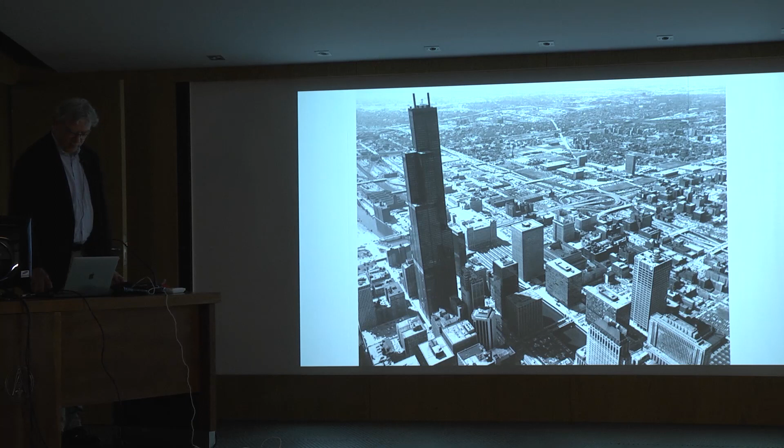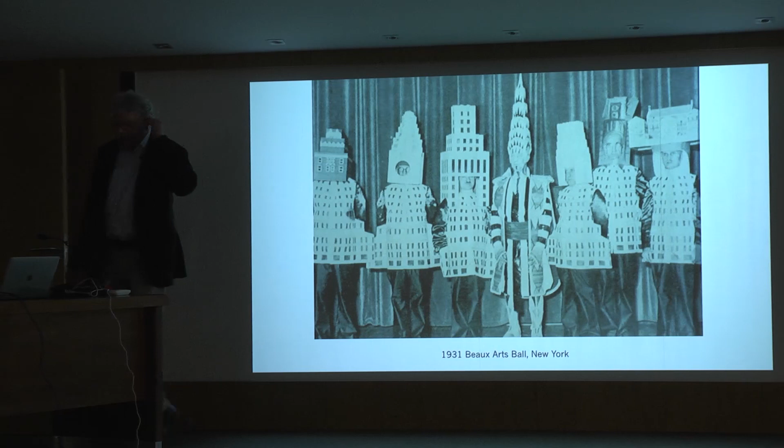So in the early 1930s, these aren't structural engineers, by the way, these are architects. Some of the buildings you recognize. This is Philip Johnson, who just recently passed away. But I show this because it's about a personal approach to design. So architecture in taller buildings is a bold move. The engineering behind a lot of these buildings is quiet, but still super important.

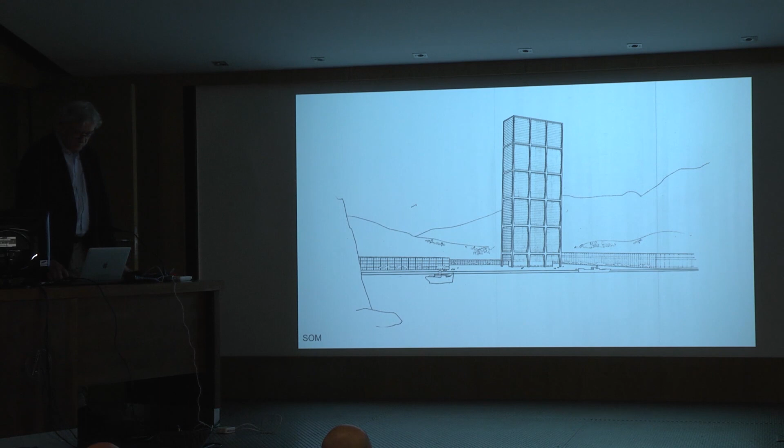In this case, the mega frame was infilled with a more lightweight frame as part of his thesis. The braced frame expressed demand in the structure and the density of material as it approached the base of the building, to resist lateral loads - this was part of the concept. This clear idea of hierarchy of structural systems was one he developed in his thesis work. The two ends of the building represent two different opportunities for bracing the structure, both valid, but using slightly different ideas.

So it was the engineer, Khan and Graham, that worked together, and that's what we stress in the coursework here and other universities around the world. How does the engineer and the architect relate to one another and create moves that change the way we see architecture and the way we use material?

The Hancock building emerged in the late 60s, starting as two 40-story buildings that became 100 stories. The argument was that the material used in this tall building would be similar to the 40-story building if placed properly. So this braced tubular frame was conceived, and the expression of structure is within it. The idea of load sharing within the structure was all part of the concept, resisting both wind and gravity loads. These moves, particularly in the Hancock building, which was built before the Sears Tower, helped shape Chicago and create density, sparking future development around these taller structures.

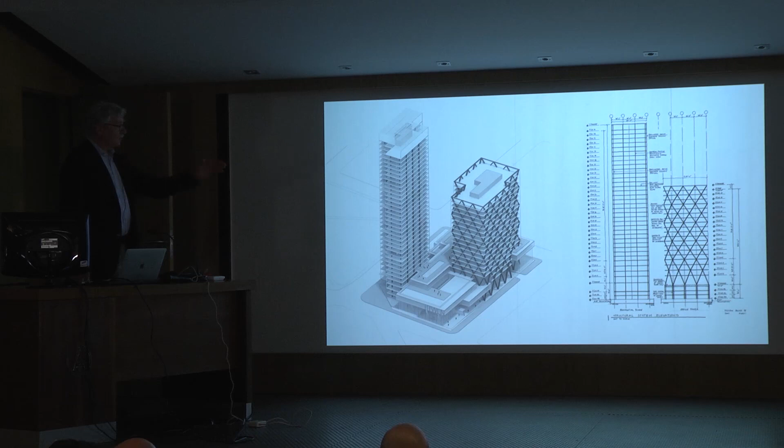So the concrete building on the left is for the residential tower, the steel braced frame for the office building on the right. In fact, the idea is to use composite materials for that building, where the horizontal systems are concrete and the vertical systems are steel, to resist the lateral loads.

We used a deep foundation with piles capped with a raft to create that structure. Winds that impact buildings and create vortices are those we use in design. The idea of movements of buildings is not what you expect. For a tall building with wind approaching this way, the movement's actually left to right, because the vortices that enter around those buildings tug on the building from left to right, and that's where the dominant motion comes from.

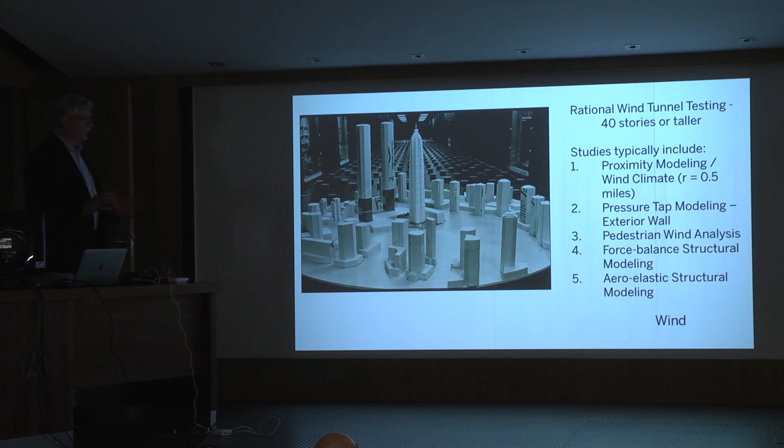Because those two tall buildings excited Jinmao. As the dominant wind came through these two tall towers, it excited Jinmao, magnified the forces by around 25 to 30%, and we designed for them. Even though those buildings weren't there, the plan was someday to build something tall, and that's what we used for the study and the final design.

But things like, where is it? Where are we trying to build this? The proximity of the tower, typically it's a half-mile radius that we look at. We look at pressure along the height of the building, the pressure taps used to look at localized pressure.

We looked at the pedestrian wind analysis, the photograph I showed you earlier. We look at something called force balance, which is taking a very simple foam model and reading the forces and demand at the base, then superimposing those values with the dynamic characteristics of the tower. And finally, an aeroelastic model that can look at different degrees of freedom. For Jinmao, we looked at three degrees of freedom: translation in two directions, and torsion.

Okay, seismicity. In areas around the world, seismic design is becoming an increased part of what we do with tall buildings. Here's some of what we think about: the intensity, the ground acceleration, the spectral acceleration, and what is the value of the earthquake? Is it a design-level event where we're designing components, or is it the maximum considered or maximum capable earthquake, where we're trying to keep the building stable in a major event?

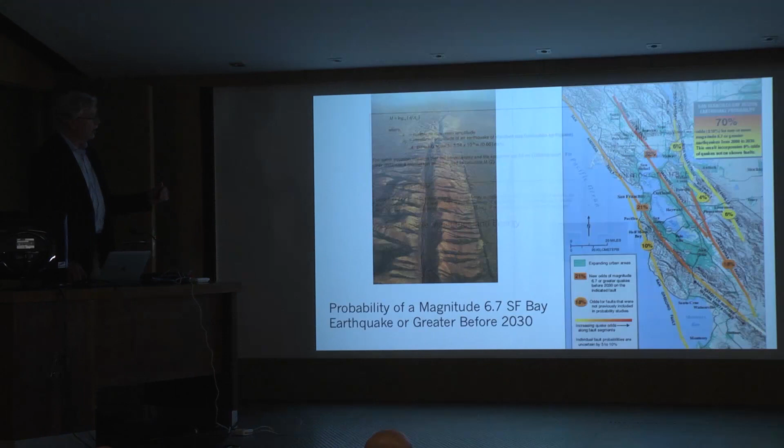So here's San Francisco, and I live right around here. So I'm straddling what's called the Hayward Fault and the San Andreas Fault. It's the Hayward Fault that people believe is going to be the next major seismic event. Director Manuel was just at UC Berkeley, and I know there are professors here that have collaborated with UC Berkeley. It's basically right on the Hayward Fault. In fact, their stadium straddles the fault, and it's designed for it. But that's where we expect to see the next major earthquake in the Bay Area.

When you talk about magnitude of an earthquake, people always wonder, well, what does it mean? What does it physically mean, right? So if we had an 8.0 earthquake, it means that the ground acceleration is about 0.5 G, and it translates into a certain level of damage that could be expected. So there's a way to take the numeric side of the earthquake and translate it into the qualitative side through these comparable metrics. When we're designing buildings, a lot of times we're using this response spectrum.

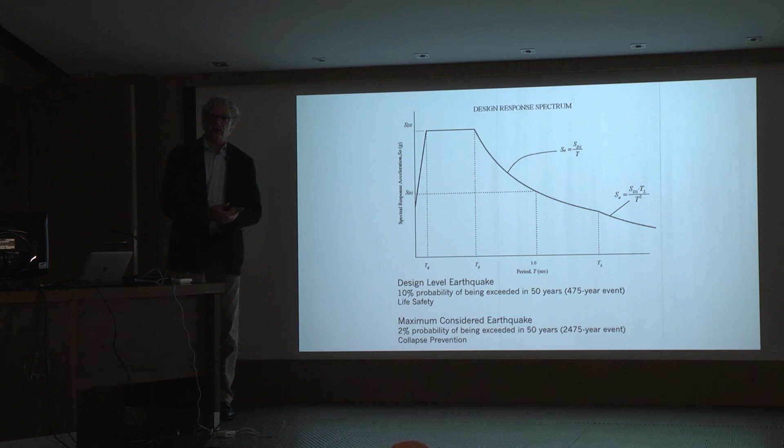This is typically from the code. And the way to think about this, especially for those students, is that the fundamental period of the building is usually the period that you get the most action from, okay? What I mean by the fundamental period, it's the period that a building takes once it's excited to go from 0 to my right, through 0 to my left, and then it comes to rest. So a taller building takes longer to go through that motion, softer, right? So a taller building has a longer period, and what you find is the fundamental period is out on this graph.

Now what does it mean? It means that the acceleration that you're designing for is less than a shorter building, okay? So you have a shorter building with a very short period, it's going to be moving probably with the ground, and again, it's going to take high demand relative to the tower that sees lower demand. So what we're trying to do is trick buildings to actually behave like this. So when you seismic isolate a building, could be a shorter building, you're trying to push the fundamental period out that way, right? So that's the way to think about it.

A lot of people think all tall buildings, it's scary to be in a tall building in an earthquake. In fact, if it's designed right, it's the best place to be because it's going to go through the motion in a slower way. Usually interstory drifts might not be as high, and it's actually, if it's done well, it's the right place to be.

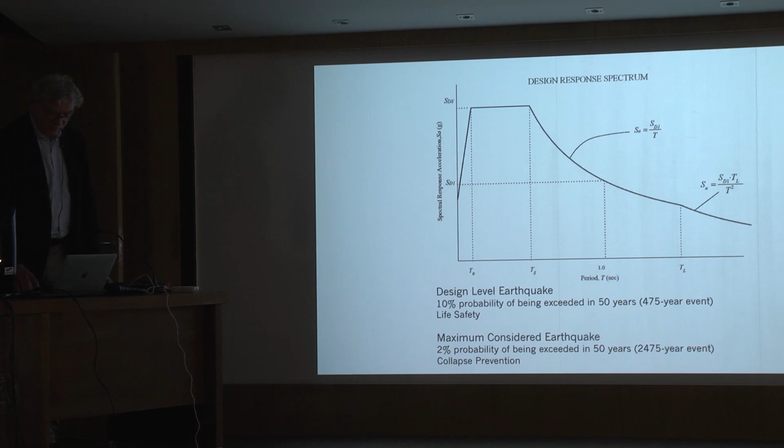Damage is really important, okay, in buildings of all scale. But when we design our buildings today, based on the building codes from around the world, we design them to be life safe. The structure may not look so great afterwards, but it's designed to keep people safe. The walls are meant not to collapse on us. The ceilings are not meant to fall down on us. The structure is meant to be beaten up, let's say, but still in service. Usually it needs to be repaired. Sometimes it needs to be taken down and replaced.

But what we're pushing for is how do you create buildings that are approaching operational modes after the earthquake? How do we make them more resilient? That's a problem because a lot of times in order to do that, it costs money to do it.

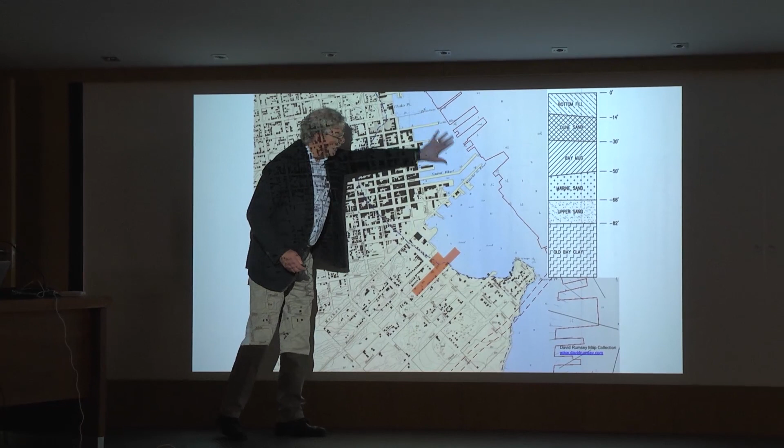In the Bay Area, we're susceptible not only to the earthquake, but to what happens with the ground. The bay along the waterfront, where you see these piers today, was built well out into the water, and the entire area was filled largely after the 1906 earthquake. The Transbay project tower and terminal are here, with part of it actually sitting where the water used to be.

This is what it looked like 100 years or so ago, and here's what it looks like today. This area is what we call risk to liquefaction. If you have shallow foundations in this red area, you're likely to have a loss of strength of the material at the surface during an earthquake, because a lot of the sands are saturated, and you basically lose the strength.

In 1989, Loma Prieta, we had a lot of damage to buildings along the waterfront here. So the point is, for tall buildings, you need to be down on the deep sands, or you need pile foundations to rock in order to develop in this area. That doesn't keep people away, because we've got a lot of development right here, right in this red area. This is the financial district of San Francisco.

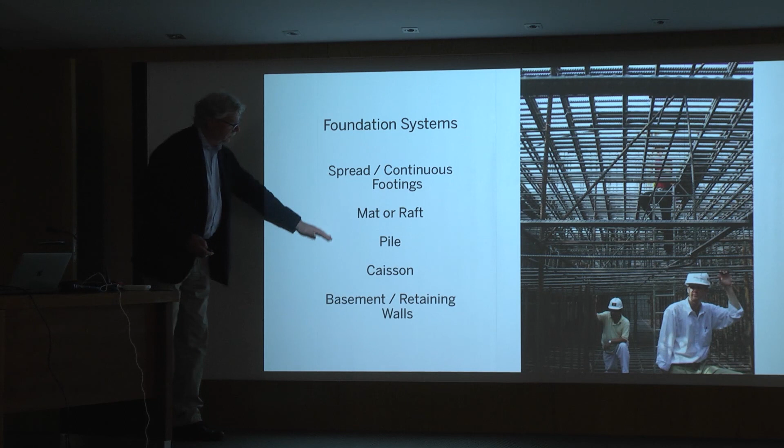When we talk about tall buildings, there's a mix of materials we might use for foundations, from spread footings with lighter loads to mat foundations and piles with heavier loads. What you see there is an image of the Burj Khalifa. That's the foundation mat, 3.7 meters deep, and you can see the concentration of reinforcement that was used there.

The Jinmao Tower in Shanghai was built on one of the worst sites in the world. It's 420.5 meters tall, an office building and a hotel, with 3 basements. But the issue there was that we needed to penetrate the soft upper layers.

So what we did is we drove piles from the surface down around 80 meters below the surface to create a bearing situation at the base, using open steel pipes that were driven with what we call followers. They were pipes we could take away for the top section, and we would leave the rest of the piles down at the bottom.

Then we created a system—we learned about this yesterday in class—how do you create temporary systems throughout a site so you can build your tower first? That's exactly what we did here. We built a reinforced concrete system in between the floor levels with temporary steel columns that could all be removed while we inserted the new construction in between, and that happened after the tower went forward. What you see at the bottom here is the tops of those pipe piles that were exposed after the soil was removed.

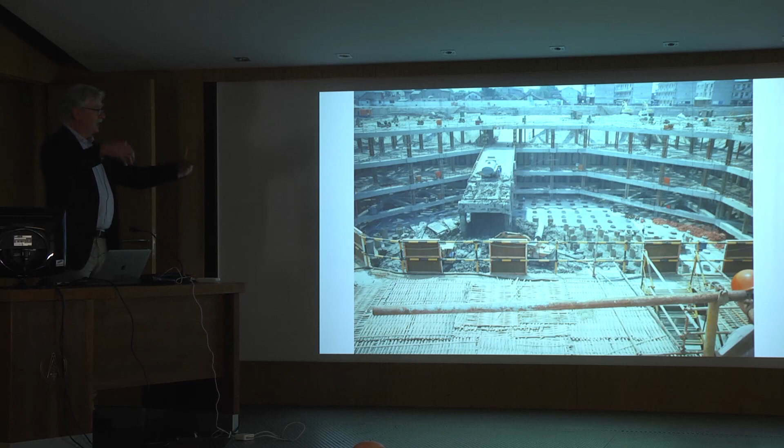Around the perimeter of the site, it's just raw kind of ideas—nothing beautiful about this except for the science of how it's done. Bentonite is used in these trenches, whether it's in Shanghai or at Harvard University where we did a science building. They're done in segments, called a slurry wall, where we insert a cage that goes down—you can see the height of the wall there—and then we pump concrete into it, and it becomes the permanent cutoff wall for water entering the site, providing the means of actually making the excavation.

We talk about displacements of towers. It's real, it's a real challenge. At Jin Mao, the tower core is here, the podium is here. This big black line is the actual measured deflection of that tower, around 70 millimeters in this diagram. In the end it was probably a bit more, maybe more like 80 or 90, and what you also see are the predictions we made along the way.

I'm sure you've read about towers settling. There's a tower in San Francisco that is settling more than what was expected, and the numbers are much bigger than this. But we worry more about differential settlement and tilting than straight down settlement. This building kept settling uniformly, and other than the problems at the street level and utilities, we don't mind—structurally, we don't mind for the tower.

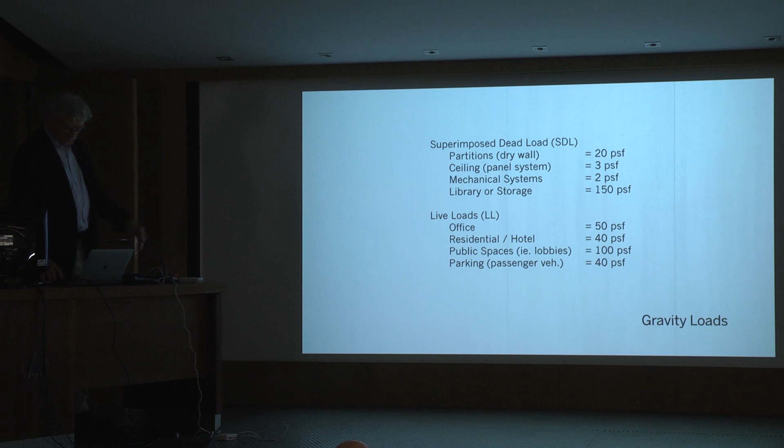The way we use the building, the loads that we put on the buildings, is really important. Whether they're live loads or superimposed loads, it helps us get the weight of the building correct. It also helps that we know what our site is like. Wind pressures over the height of the building are very important, and they translate into forces based on the tributary area that they impact.

These are forces that we apply to the tower itself. When we design for earthquakes, we look at the horizontal earthquake and the vertical earthquake. Both are impactful. For many sites, we use the code for vertical earthquake effects, and there are calculations you can make. But if you wanted to be more sophisticated, you'd actually do a site response spectra, looking at ground motions, both vertical and horizontal, to design your building. There are lots of ways of doing this, and the European codes are a bit different than international codes or codes in cities in the United States.

But the fundamental idea is you're trying to get a base shear at the bottom of your tower, and there are factors that impact it. Period is one, and also a factor called R, which is a response modifier. For buildings like frames, R is higher. If R is higher, the effective force that your building sees is lower.

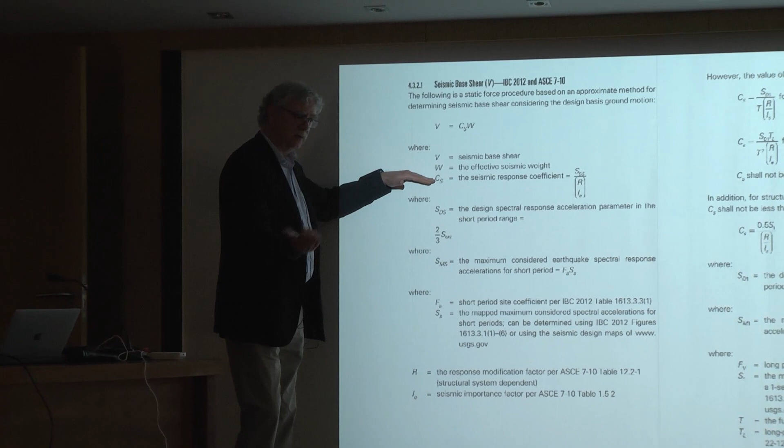So if you had a concrete shear wall, the ductility factor would be lower, it's less ductile, the forces would be higher, compared to a steel frame. These are tricks you can think of in systems for structures and tall buildings that impact ultimately what the forces are and how much material you use in the building, whether it's by code or by performance-based design, which I'll talk about a little bit later.

There are other things we think about, like seismic dead load. We're not going to get all the live load at once, but if you have storage in your buildings and other things, you have to take a fair amount of that into consideration. Mass impacts the lateral system, and keeping the mass down is very important if you can do that, because that's going to lessen the seismic demand.

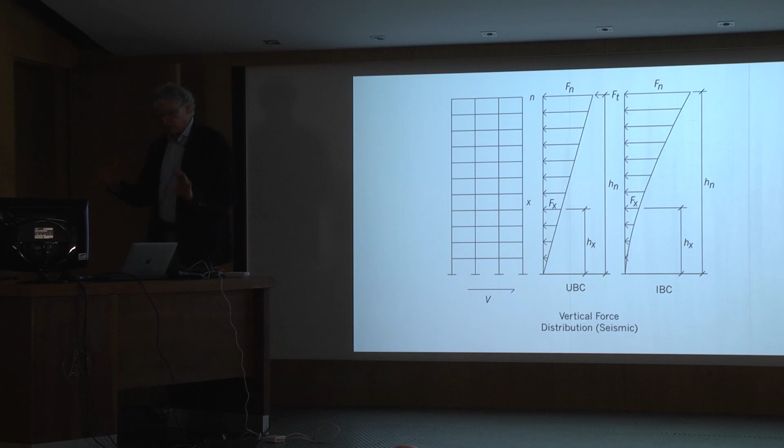Then we take things that are regular, like that building I showed you earlier with the moment frame, and we apply code-related demands due to seismicity. For years it was a triangular pattern; now it's slightly nonlinear in terms of the application of force. The idea in older codes was to apply a force at the top that considered higher mode effects, since buildings that vibrate at a high mode of vibration activate mass, which was the reason for that higher concentration of force at the top.

So you take the forces calculated at the base of the building and push those forces vertically, creating shears within the structure, and then story shears based on the floor-to-floor heights. You come up with loads and bending moments, and these moments are used to design things like the bases of shear walls or frames. These are things you can do by hand to take something really complicated and create something you can understand the fundamentals for.

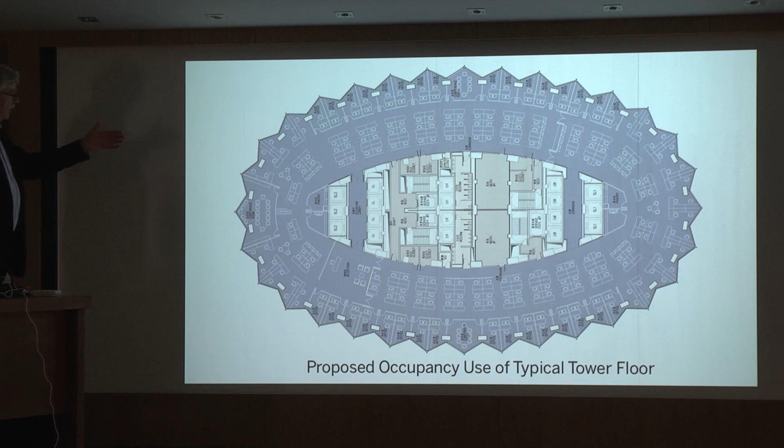This is an example of a tall building in China, in Tianjin. I show this because the use of these buildings is very important. Yesterday we talked about elevatoring in the service area—the core is largely driven by services. It just so happens that in a lot of these tall buildings, the geometry of the enclosed area for services, elevators, mechanical rooms, restrooms, is about what you need for the size of the structural core in the middle. In this case, you have a frame and occupied areas that are like bay windows—really great office spaces because you don't have anything in the way as you look outside.

So we take these loads and apply them to buildings of different geometries, whether it's cores or occupied spaces. We're trying to come up with a way to create an equivalent situation so that we can actually design it. Otherwise, if we're stuck in too much detail, we'll never get to the finish line in terms of the final design.

We need to think about the exterior wall. In seismic events, heavier systems create more demand. So precast plus glass at the exterior wall is a lot heavier than metal plus glass.

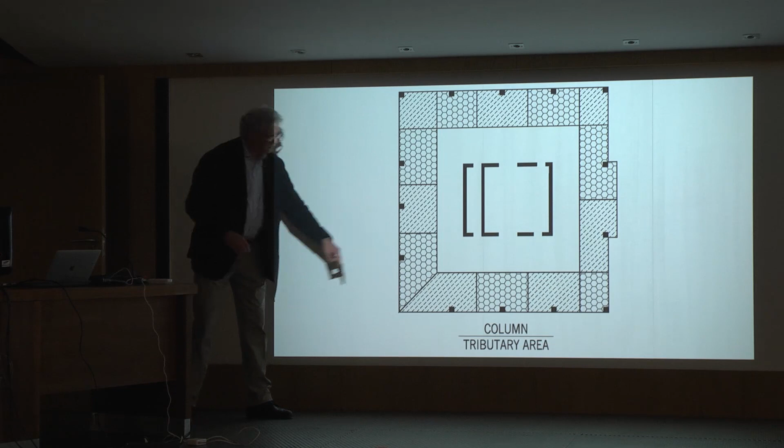In a tall building, you can break it down into some really simple geometric ideas, where the core takes a certain amount of gravity load and each column takes its own tributary area. Why is this important? Because we're trying to get the gravity loads down into these columns so we know the load it sees. In certain situations where you have cantilevers, that demand is going to be higher, and column sizes are likely to be higher.

Then you combine all these loads to create a force that you design to. So you combine dead loads plus loads due to fluid effects, snow, wind, live loads and so forth, using statistical ways of combining them together. Earthquakes are really important, and certain key elements require overstrength. You see this omega factor, which amplifies the force for elements you just can't lose in a major event. Sometimes that value can be 2.5 to 3 times as much, to put extra material there to protect that particular element.

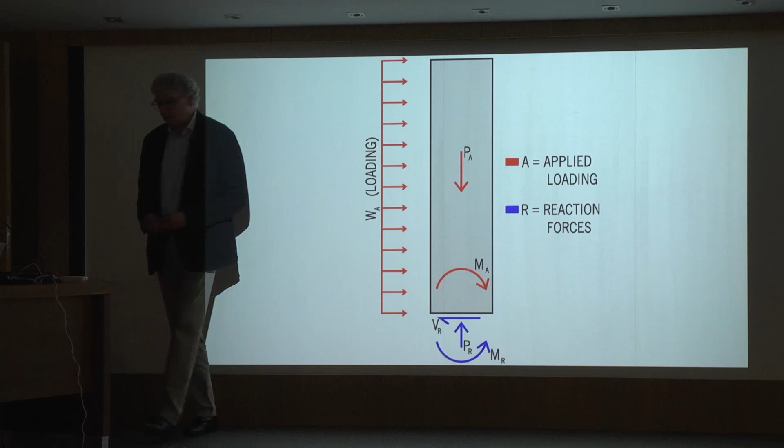But if you were to take a tall building and simply look at the statics, this is more or less what you have. If you had an applied load due to wind, and you had gravity, you get an overturning moment and resisting forces. You could then dissect it and use moment arms and so forth to resist those loads and come up with some initial sizing of the structure.

Now why is that important? Well, if the building is overturning, and let's say this was the front side of the building trying to turn over, you could look at the loads due to uplift, and hopefully the weight is counterbalancing the uplift. So knowing where the forces are due to the weight of the building is super important. You define this, you figure it out, and put the forces where you want them.

In some buildings, we have higher concentrations of forces at the corners. There might be two big columns that we force gravity load into, to resist overturning. But it's based on these principles that the tall building is like a beam. Loads are applied, there's a web, there's a flange on each side. It looks different in a tall building — it might be columns that make up this system — but the concept is the same.

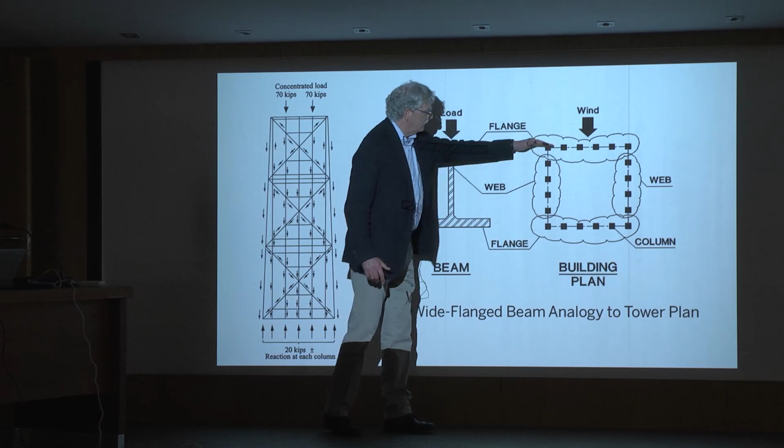So for bending, we're trying to distribute the load through the webs and the flanges. Typically in this kind of situation, the web might be skinnier — maybe these columns are smaller due to the demand, and these are heavier, okay fine. But then the winds can come the other way, demand can come the other way, so you have to think about it multi-directional. The sizing of it is not respecting a single direction of force.

The other thing that's really important to us when we conceive of these buildings early on is drawing a structure to try to understand what the major systems might be. In this case, it's a composite building. We've got a core wall that's concrete, we have steel framing, and we're introducing this idea of box sections in steel that also act to distribute forces.

Air coming out of the core could feed into these elements, and then you could distribute them into the floor system. Get rid of the ductwork, right? Just get rid of the ductwork.

There's a lot of resistance to do this. And why is it, especially in places like the United States? Well, it's because the trades are different. The trade to build this concrete wall is different than the steel trade, and it's different than the mechanical engineering trade. So it's a struggle to try to just integrate what we think is the best way to develop the design.

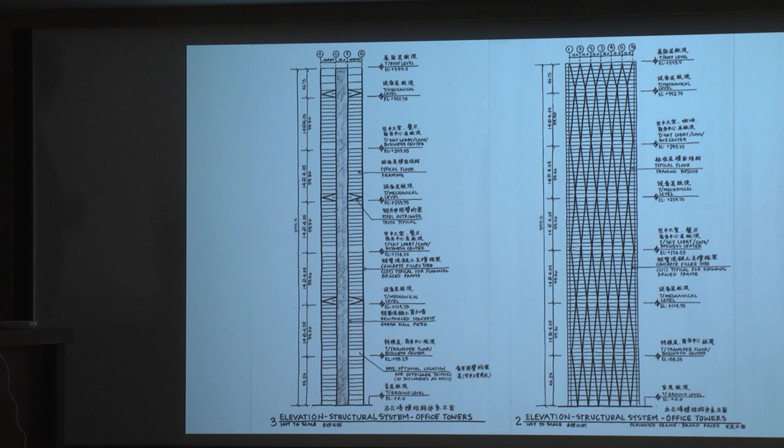You can take the core wall system in a tall building and link it to columns or a frame, in this case, by outrigger trusses. These outrigger trusses have an interesting shape, just a triangular form. What happens is this core wall is subjected to lateral loads. It applies load to each side through the outrigger, and the frame at the outside looks like that. So that point lines up with this point, right? And it applies load due to overturning, but it does it in a creative way. It's not a single column on the outside frame, it's a diagonal frame instead.

There are 35 drawings for the Hancock Center in Chicago for the structure. That's it, 35. And this is one of them. Really straightforward. Why do we have 10 times this many drawings today when we draw the same building? I guarantee you, if we drew it today, we would have 350 drawings probably.

The reason why it's frustrating is because this is all you need to show. You have the frame at the outside. The sizes are shown elsewhere, single sheet. You have a core wall, a core system that exists within that inside frame, and you show it on another sheet as it changes. But the outside frame to it is exactly the same. And the beam sizes are shown here, column spacings are shown here.

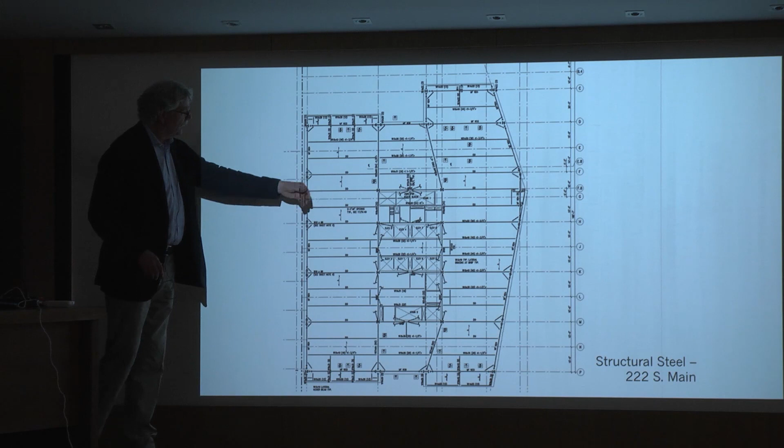It's a technique to show what structural elements are. And as students, we think that this is very important. Force yourself to draw it because it helps you see other things, like how does the exterior wall connect? How does the MEP work? How does the ductwork come out of the core? How does it relate to the depth of the beams? It's all super important, the idea of mixing systems, concrete walls and steel framing.

If you look carefully at this, there's something different happening over here. There are signs of it, right? It's a frame, you don't quite know why. But if you look at the full set of drawings, you'll find that at the bottom of the building there's nothing here. So this is a large, three-story Vierendeel truss that works both vertically and horizontally to span the distance. So there are clues to seeing the structure through the drawings that aren't so obvious when you first look at it.

There's also clues when you see the structure's correlation with architecture. So this is a hotel floor in a building in China, and you'll see there's more or less a direct correlation, I hope, between the way this layout is seen and the way the structure's shown. In this case, it's just reinforced concrete columns and beams.

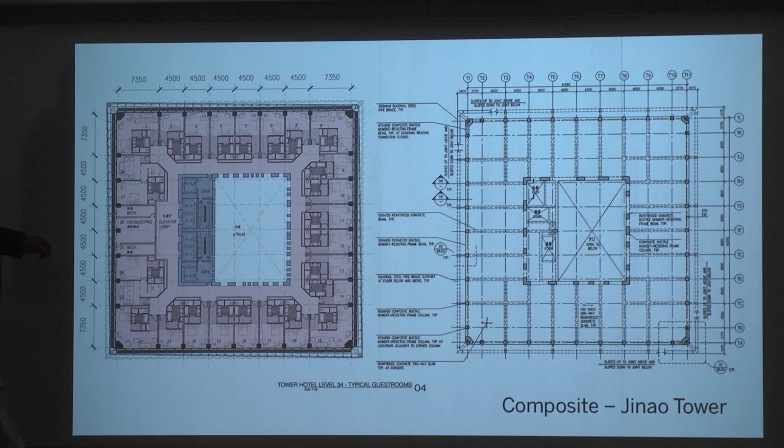There's something special happening on the outside of this, though, that is important to the building. In plan, you can't quite get the full picture, but in elevation, you see something that's different. There's a folding pattern that happens throughout the height, and there's a diagonalization that happens. What we did is we introduced a steel pipe that wrapped the structure. Yesterday we actually saw one of these, and I think we'll see this later when we look at the models that were built.

One of the students, or one of the student teams, looked at the same kind of system that we used here. But that was not to complete the X on the face of the building, like the Hancock building, but to think about the building three-dimensionally, so that the X was completed on the other side.

So this face has a diagonal member. On the opposite face, we put the diagonal member in the mirrored position, so that every time the demand came from wind or seismic, you always had members that were either in tension or compression. And the wrapping of this system was important.

It wasn't just because the structural engineer wanted to do something different and fun. It did many things. It held the exterior wall and created the pattern at the outside. It created a double wall system, exterior wall to inside wall. But in terms of the structure, it took what conventionally would be done in the tall building where you have a very heavy shear wall and a frame on the outside. And we were able to perforate the frame, take away a lot of concrete because we had the simple wrapping of steel on the outside.

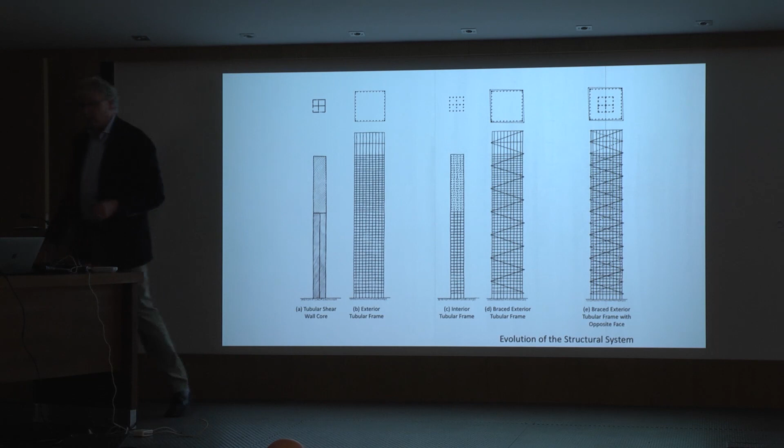So why do it? Well, you do it because you reduce construction time since you have less material to place, and you reduce the amount of material. We were able to take about 20% of the concrete out of this tower by simply wrapping it with the steel pipe. It's a conventional 2-foot diameter pipe that varied in wall thickness, attached to the outside and wrapped all the way up. The frame in concrete was designed for gravity loads essentially only.

The Sears Tower is interesting for many reasons, not just because it's a unique structural system, which is a bundled tubular frame. It's a series of these units that are linked together. This is nominally 15 feet on center, and it just repeats.

Sears came to us with this idea of the super tall building. It would be the tallest building in the world for many, many years. But how can we build that building quickly? How do you come up with an idea that could be pre-assembled and then quickly bolted together?

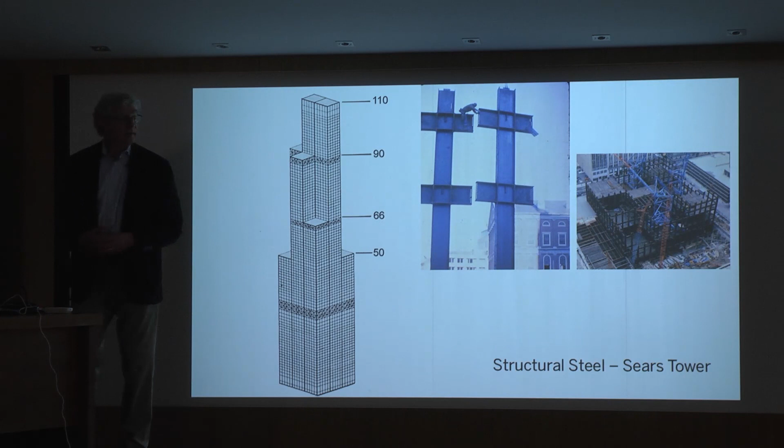That's what we did here, where the bending moment was very low at the midspan because it's mostly dominated by lateral loads due to wind. We're able to simply bolt the midspans together and quickly build this building in modular units all the way around. So today we still think about this in our buildings — how do we come up with modular ideas, things that are prefabricated where we can control quality and then get it to the job site and have it built quickly?

When we design buildings around the world, we're looking for clues, looking for inspiration. In China, there are many opportunities to not only build buildings that are tall, but also look at cultural issues that resonate with the people that live there.

Some of you may have in your apartments or houses screens that separate rooms. There's a frame, like Goldsmith did, and then the insertion is a diaphragm. A lot of times it's translucent — it could be fabric, it could be something solid. But the interesting thing is that the fabric helps to stabilize the frame.

In China, there were these screens that we thought were interesting. So how do you come up with a way to translate that into a building that is nominally 150 meters tall and 100 meters tall? And then actually look at two different faces, a face that expressed structure and a face that didn't.

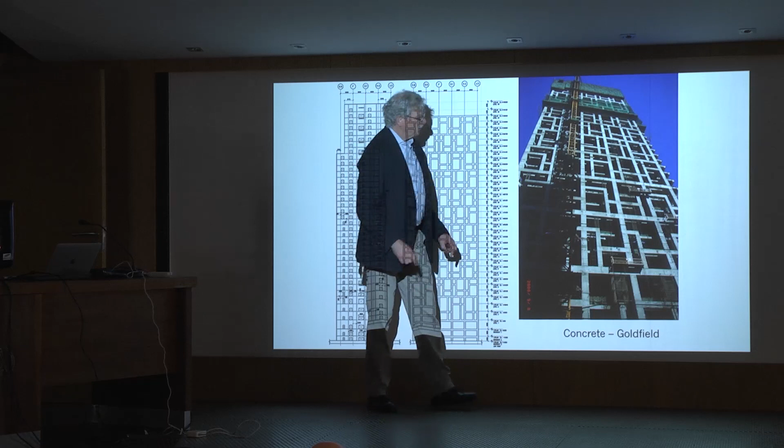And if you look carefully at the way we built it, we held out the elements in the structure. Why'd we do that? Because the gravity loads on the building, we wanted them to be inside these major columns. We didn't want them to load up these asymmetrical frames. So we left the concrete out, so that the loads, the creep, the shrinkage, and the elastic shortening all occurred in that main frame.

And then we went back, before we put the exterior wall on it, and we filled it in. I was on a flight with one of our architects and had this image in front of me. You look at this and think, my God, what am I going to do with this? It's just crazy, right?

The easy thing to do would be to build a frame and decorate it, just put the exterior wall on it. Who cares, right? And I started to think, well, what about the negative space, the space in between these lines? So this is a representation of the negative space.

And then flip it to the positive. Make these spaces that were dark, these negative spaces, turn positive, in this case the white spaces. And then reverse it, make the dark lines structural, and use them as infills.

This is an earlier phase of the project. The geometry changed on the infill, but the concept was the same. And then the major frame there was on the far right. That was the regular idea: three modules tall and 9 meters wide.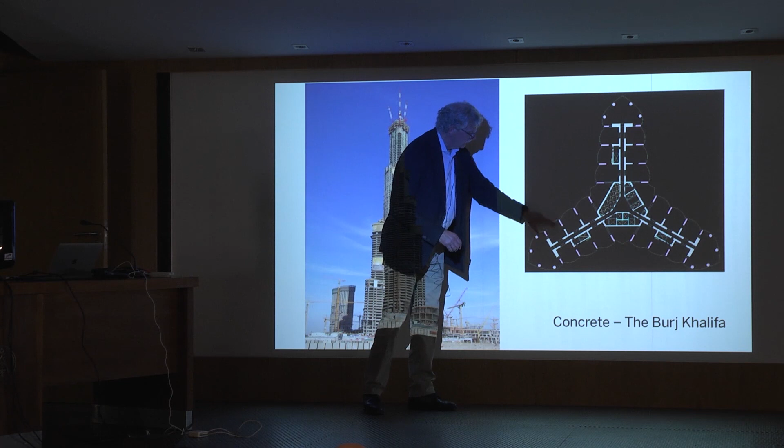So when you read this structure, you see that you have these major spines that form the corridors for the residential units. And then splaying from those spines, that center spine in each direction, you see walls that project beyond that. This is called a buttress core.

The core is pretty regular all the way up the building, and it's closed and torsionally stiff. That's where the elevators are, that's where the mechanical spaces are, back of house. Everything else, essentially, there are some stairs, but everything else is your unit. And your unit doesn't have any column, right? It's all open, a really straightforward idea.

It's a tripod, like that tripod right there. It's a very stable and efficient way to resist lateral loads. And it's done in concrete, not in steel. It was the tallest building, not only in the world, it still is, but the tallest building in concrete.

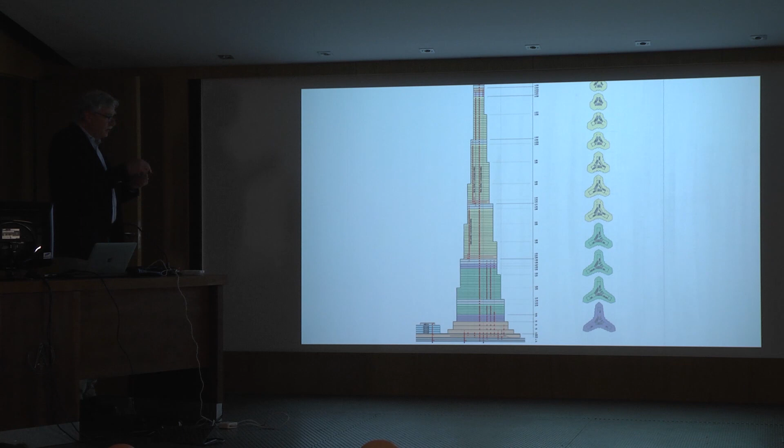As it steps upward, there's an erosion of the form, and there's a transfer of loads. So the loads coming down from above with these smaller pieces are transferring in and moving down through the system. But everything you see in terms of the inner workings of this building are all aligned. The core is aligned, the stepping is aligned in a way so that we don't have large transfers, and it all respects the form of the outside.

Jin Mao, you can't understand what the structure is. You look at it and say, okay, it looks like a pagoda, right? Okay, fine, it tapers. But what you'll notice, if you look carefully, is that there are 4 points in the tower that stay in the same position all the way up.

If you stand at the bottom of this building and look up, this is a straight face all the way from the bottom to the top. And if you walk around, you see the same on the noses of the other sides. So what happens is that the form erodes back in between those 4 points. And why is that important? It's because we could take a big core in concrete and link it to 8 columns at the outside.

It's the first time it was ever done this way, and I'll explain what I mean. In China and other places around the world, when you look at tall buildings today, most of them are using this system, and the reason for it is that it's a very straightforward idea of linking the core to the outside with these big trusses.

It's called an outrigger system. You can use steel or concrete for the walls if you wanted to link them. What it does is link the core to the outside during an earthquake or during wind, and it acts like arms—like reaching for ski poles to stabilize yourself. That's the idea. The principle isn't any more sophisticated than that.

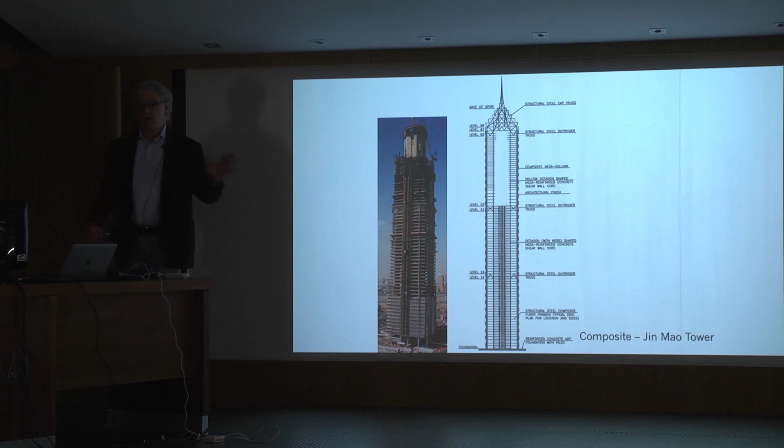And then you can take that and create architecture in plan that's pretty interesting. The office building at the bottom is really regular, like a square, and then you erode the sides at the top. For the hotel, we need less space, so we erode the outside and put a large atrium in the middle. All the rooms have good views.

All the rooms have easy access to the elevators here, which connect to a sky lobby above the office space. If we tried to put the elevators in for the hotel space above, this core would never have worked. So we put a couple of elevators in to get you to the sky lobby, you get out, get your key, and move into the space above.

So we're able to use this huge scale with really straightforward principles and mixes of materials to create a structure that, if you learn about it, you understand why we did certain things in terms of stabilizing it.

And the space within the atrium is pretty dramatic. I think it's still the tallest atrium in the world—around 650 feet or so. You can see the elevators on the right-hand side that service the hotel.

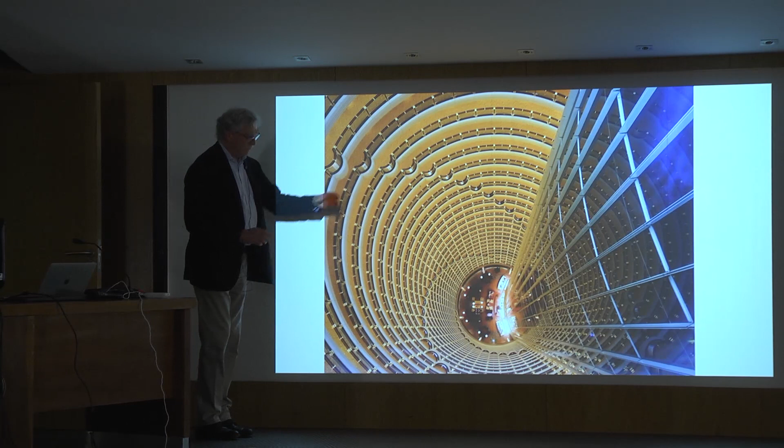It's a circular form inside of the octagon, and that circular form has a simple move of a projecting slab that creates this spiraling effect. It's through this simple projection of the structural slab that we created it.

Putting openings in tall buildings is important—it helps the winds pass. In this tower, which is very slender, we allowed an opening in the broad face of the building, nominally at around 2/3 of the way up. This was used as an area of refuge for fire, but it also allows the winds to pass through.

What you see in this building is a bit of an expression of two buildings. On one face, the south face, you see this braced facade. On the north face, you see a regular frame. And we link those two frames together with trusses.

The frame on the south is really important because it resists lateral loads in the direction along the frame, but it also helps with resisting overturning and distributing loads from column to column. So it acts almost like a belt over the height of the building to distribute the loads across. So the south looks like this—there are two towers.

The other thing I'd point out is that normally in tall buildings, the elevators, like I showed you before, are loaded with concrete—they're really strong, it's where you put all your material to resist the load. In this case, we wanted to change the idea: make this translucent and transparent. This is where you'd use the elevators and restrooms, and we made it light-filled, lightweight.

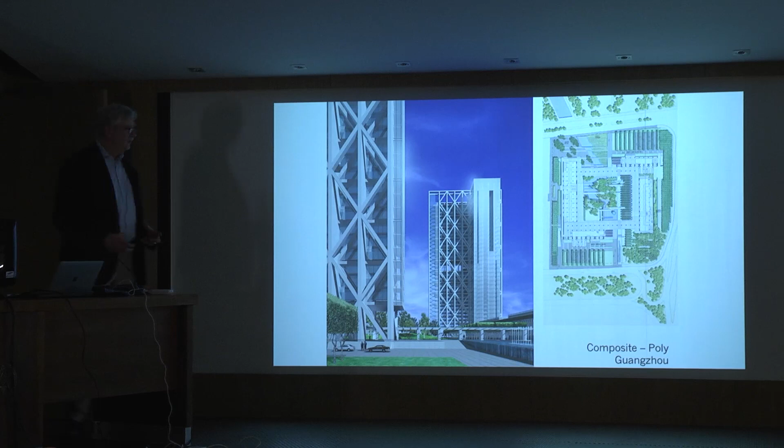So we attached these vertical cells to the main structure, to this billboard, to create a new concept in the way you use the building. So the north face is really regular.

What's important in this building is sun. The sunlight on the south moves east to west, and it projects against that diagonal grid, which also helps to shade the south face. This is in Guangzhou, China, where the summers are very hot, and we're trying to control the temperature gain inside the building.

The spaces are column-free, so the frame on the north versus the braced frame on the south—you can see the way the services are plugged into it on the back side.

We used a mix of materials, steel and concrete, to create the braces and the walls, concrete walls braced with steel, and we use that for mixed purposes, as I mentioned before, with the walls set back.

Somebody would say, why did you use a double line of bracing? Why not just a single line? It took us a year to convince our clients to do this, because we thought it was interesting - the braces could be smaller to resist the load, but also the way the sun hit those two braces gave greater shading capability, plus it looked unusual. So we won the argument. We have these two smaller lines of bracing.

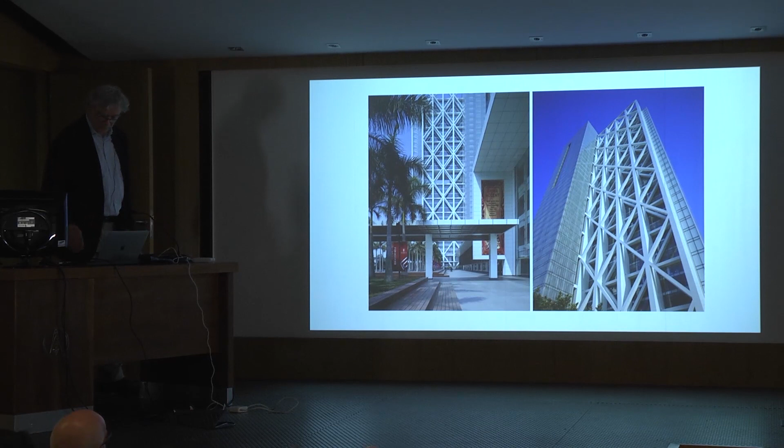The proportion could be such that we think is beautiful. It's quiet. The relationship with the ground is quite good. And it's a bit of a campus between these two buildings, where the base is just as important as the tower.

So when we think about tall buildings, there are these things called attributes and characteristics, and it comes from behavior. The Burj Khalifa is kind of a freak of nature - the scale of it is extraordinary. These are 40 and 50-story buildings.

Now, there are other buildings that have come that are taller. But it's the motion of the building, the serviceability, in addition to the strength, that's really important when we design the towers. So we think about wind and seismic events. For students here, in a maximum seismic event you may see 10 times the demand as the wind - 10 times the displacement, 10 times the forces.

We think about material, concrete, steel. And then we think about serviceability. What do we mean by that? These buildings are not static. They all move, and some move more than others.

But for wind, we typically look at a 50-year return event for drift. It's H over 500 over the height of the building, but also H over 500 of the interstory part of the building. And we design all the systems to include that relative movement.

We typically think of wind and elasticity. We don't want windstorms to make the building plastic, meaning it doesn't move back to zero. You want the winds to be intermittent so the building always comes back. A seismic event is totally different.

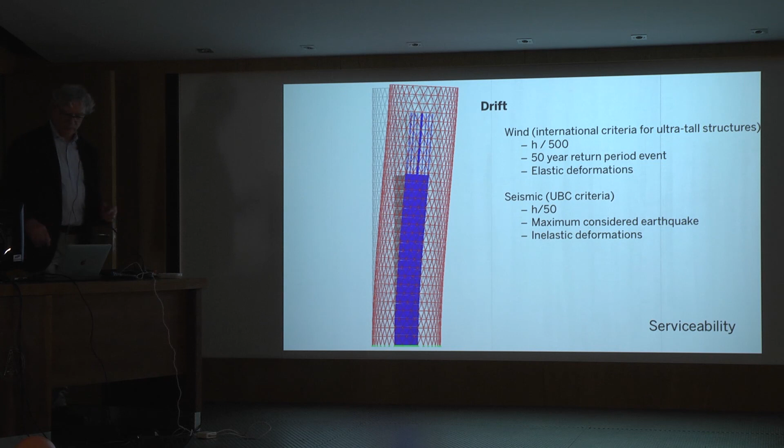Inside the building, it's super important to think about accelerations, and whether you're in an office, a hotel, or an apartment - these are all things we have to think about. In an office building we're more tolerant; you can take on more acceleration. Why? Because you're moving around.

You're sitting at a table, interacting with your colleagues, so your tolerance is greater than it would be in a hotel or apartment where you're staying most of the day, sleeping, with less movement around you - it's just yourself, maybe your family or partner.

These thresholds of acceleration are in thousandths of a G, so very, very small. The inner ear is very susceptible to motion, both translational and twisting motion, and it's worse when you have a point of reference. If you look out the window and see another building next to you while twisting, you'll start to feel sick. If that building wasn't there, you may not even feel it.

So these are things that we think about. We can calculate these - there are code equations you can use. But these values largely come from studies in the wind tunnel. You can also dampen buildings - you've heard about tuned mass dampers.

The structure itself dampens itself out. Concrete typically dampens out a building faster than steel. That's because, depending on the demand, the concrete cracks, it dissipates energy, it gets hung up, versus steel, which is elastic.

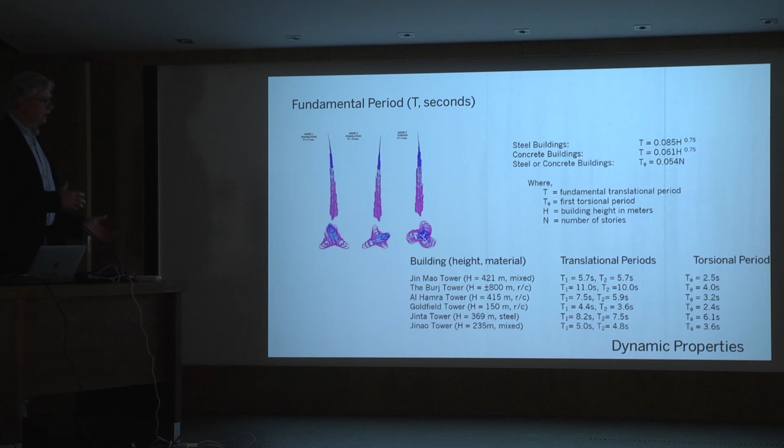And building periods are important - they get into the dynamics, the wind, the seismic. These are the periods of major buildings around the world, like the Jin Mao Tower and the Burj Khalifa. Jin Mao, which I showed you at 420 meters tall, has around a 6-second period, versus the Burj, which is twice as tall with about twice the fundamental period.

It doesn't mean you can't design a circular shaped building, but it probably behaves the worst in the wind because of the vortices. You could design buildings with openings to allow the winds to go through - that helps a lot, and it's a way to manage the forces. Again, it's the crosswind motion we're worried about, the dynamics that move the building this way rather than that way.

Hopefully I can play them. This is just to give you a sense of the issues of wind.

First of all, vortex shedding - let me just show a few things before we take a break. This is vortex shedding, and the idea of vortices, the organization of the vortices around the sides - this is what's tugging on the building to make it go back and forth. So that's for a square shape.

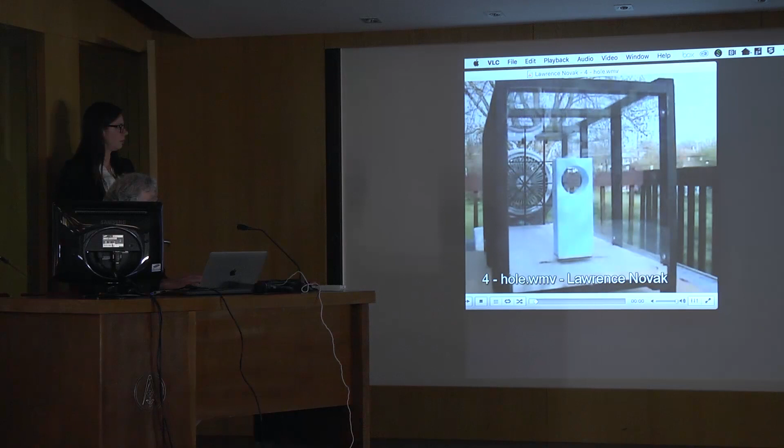Now you take the same model and put a hole in it - this is what happens. You can see some higher mode effects there that are happening, but it's pretty calm, a pretty calm building. So the big opening is pretty good - it's a good idea.

That doesn't mean our architects are going to let us do this. This is not necessarily what we can accomplish, but it's a good idea from a structural point of view.

Next idea, taller building, but put slots in it. It's better than the shorter building without the slots - let's try it one more time. So slots are good, and they're good because you can use them for other things - you could actually generate power by allowing the winds to go through the side and putting a turbine on the sides. Just an idea.

So it's dampening it out. The building motion comes to a halt much sooner. Now, what if you turned it? No, sorry, this is still in the same direction, only the geometry is a little bit different. So it's a bigger cell, and it's sitting on top of that rectangle that I showed you guys earlier. But it's doing a pretty good job.

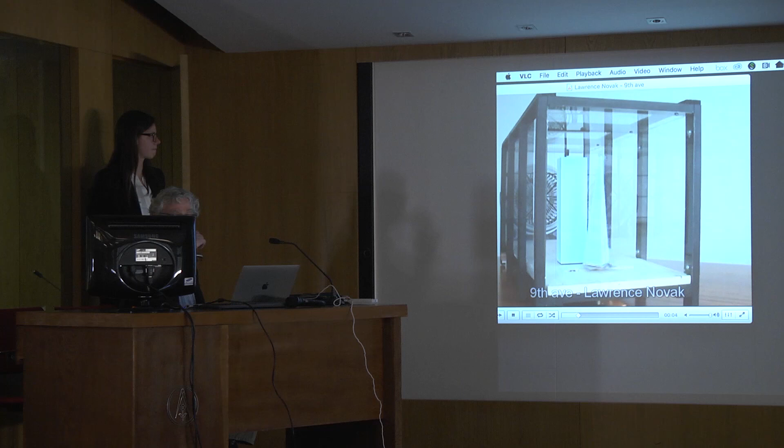Then we also talked about upstream buildings. So there's the rectangular tower upstream of the other tower, of the pyramidal tower. Now what's happening is that it's aggravating it and activating the fundamental period of the building, and the higher mode effects aren't that big of a deal, right? But look at what that tower did

upstream of the pyramid. So anyway, these are all things to think about, and they're qualitative, at least in the diagrams, right? They're qualitative. But when we design these buildings, you can at least start here and then verify it later on with more sophisticated testing and analysis.

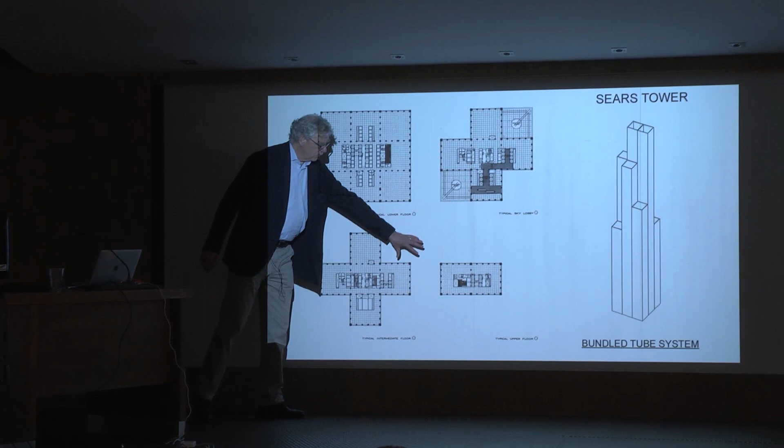It took individual components that had moments of inertia and combined them together to create something that was much more significant.

When we talk about tall building design, there are two things that we think about in detail. One is gravity load, and its impact on material quantities. The second is lateral loads, which could be wind or seismic. As you build taller, the amount of material needed for the gravity system increases linearly, fairly flat. But for wind or seismic, it becomes asymptotic. So the idea is coming up with systems that drive the quantities down for the lateral resisting system.

When we designed the Hancock building, it was one of the first times we used computers to analyze the structure. We created substructure models that verified the hand calculations. Fazlur Khan was an important part of taking the application of engineering and science, and applying it, using computing to speed up the process and come up with a dual way of getting the solutions.

When we talk about steel systems, they're like species of animals. Based on size and scale, the species changes. For shorter buildings, we might think about frames that resist lateral loads. As we get taller, the system changes from braced systems connected from the core to the outside, to that mesh idea I showed you earlier. These are ways we deal with very tall buildings and the efficiency in design.

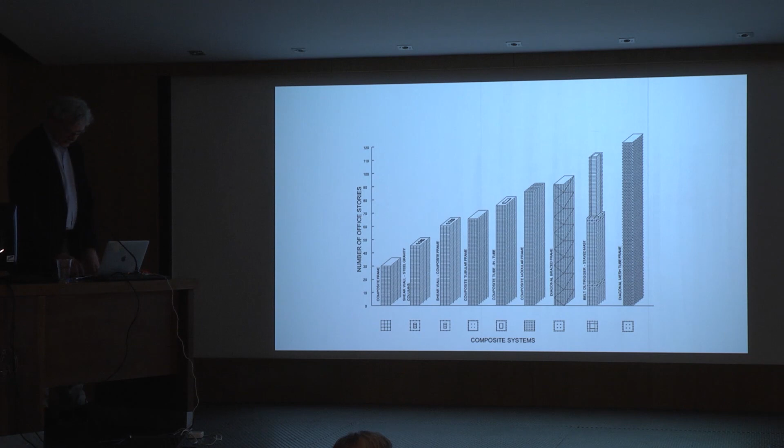This is important when we plan cities, because the geometry of these buildings can be changed. We can change the materials, we can make them more efficient. So when you layer in elevatoring and structure and so forth, what's left over for usable space is really important, because that's the leasable space.

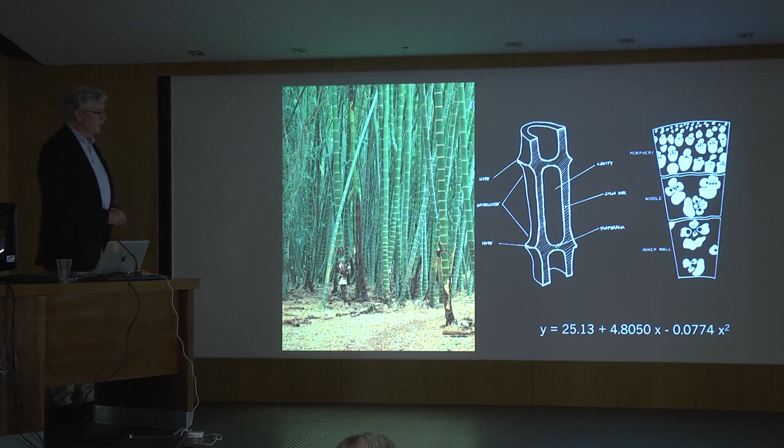There are quadratic equations that people have discovered that consider the growth of bamboo. When you plot them vertically, you get a curve like this. This curve is similar for the diameter, the wall thickness, and the spacing of the diaphragms. If you plot the wall thickness over its height, this is the height of the building, and this is the diameter. You find it's a quadratic equation, very similar to the equation for the bending moment of a cantilever subjected to a constant load. So the characteristics of bamboo are directly connected to the mathematics of how you actually engineer structures. Makes sense. It has to make sense.

We looked at this, and we think there are ideas that are important to consider. As with the spacing of the diaphragms in the bamboo that are not even, perhaps the spacing of the outriggers or the diaphragms are also uneven, tighter at the bottom where the demand is the highest. Yesterday we talked about outrigger placement and the idea of locking the base of the building in a more substantial way. That's the idea, but you can take it and apply it to buildings of various heights and incremental systems that have a mathematical basis to them.

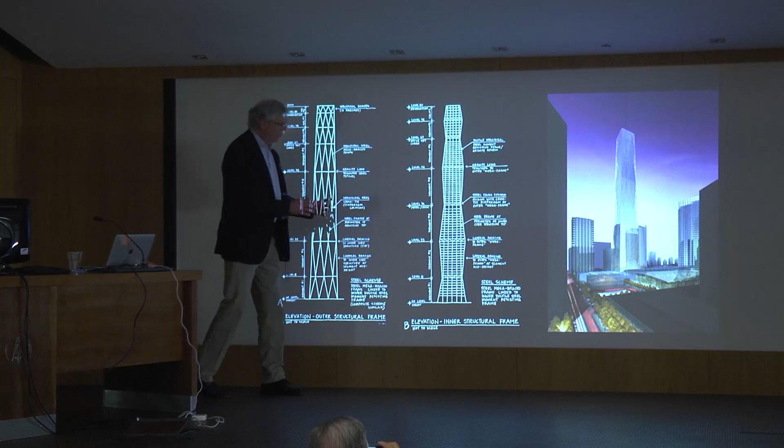This is a proposal for a tall building in China, in Beijing. It has not been built this way. It was built, but not with this system, where the outside was similar to the Hancock building, for example, and the inside was a form that varied in shape. We interconnected the inside to the outside to form a double skin and the architecture that you see in the image on the right.

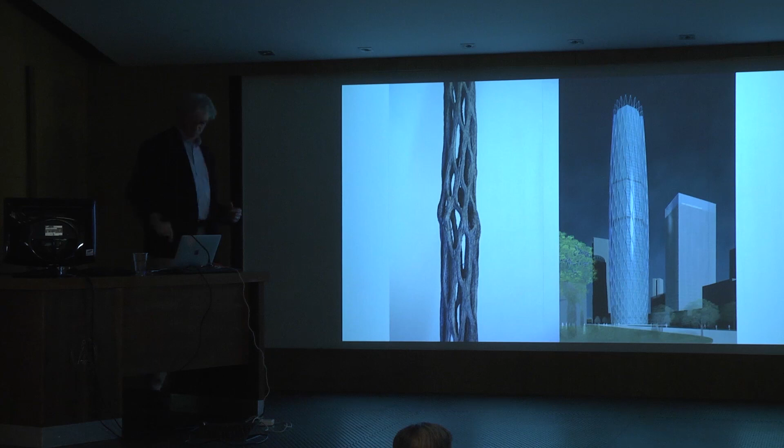If you look carefully, you'll see the spacing at the base of this tower's frame is smaller and more horizontal. In this building, the idea is we have a gravity frame wrapped with a steel lateral load resisting frame only—sort of like that tower I showed earlier with bracing that wasn't a complete X on each face. Gravity wrapped with the lateral system around it. So you can have fun with this and think about systems that are much more organic than we see today.

There are some flaws in this—curved members might be beautiful, but there's an eccentricity. We talked about eccentricity before with load; this is an eccentricity of applied load and placement of material. There could be straight members in between, but nonetheless you create something based on the principle of mathematics—in this case, trying to take the Fibonacci sequence and incrementally plot it, not horizontally, but vertically, and create a form that might save material.

If you add these forms together, you come up with braced systems you didn't think about before, but it has the basis of an idea that could save material. When we analyzed this building, we found you could save about 20% of the steel in the perimeter frame because of this organic transformation from bottom to top. What you get out of it is something futuristic, maybe buildable in the future. It's a little aggressive in terms of scale—the member sizes are a bit too small in the rendering, but you get the idea.

When you take elements subjected to tension and compression only, you can assemble a mesh. If you took that mesh over the height of the building, you find the scale is quite beautiful. This is floor to floor, and the scale is such that you can connect and resolve it even with complex plan geometries, creating something that's always in tension or compression.

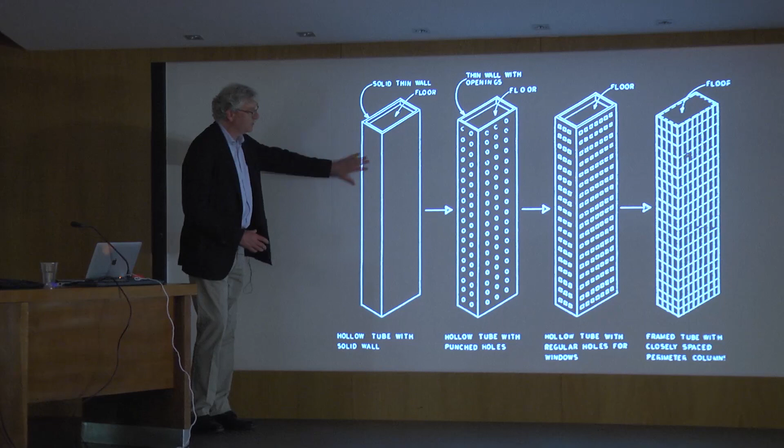Fazlur Khan, in his writings, thought of the perfect structure as a solid tube. Well, this doesn't work for a tall building, obviously, so you start to put holes in it. Circular holes are best, but that may not be an appropriate architectural solution. You start punching it with rectilinear holes, and end up with the idea of the tubular frame. But if you start there and end there—our hope is there's an evolution in the progress of systems, and this idea might be much more efficient.

So why is it more efficient? A couple of things: the tension and compression is true in every single element. But in addition, the load tends to wrap around the system in a much more efficient way.

Now, what do I mean by that? So as the winds move through the building, and let's say the building is translating up and down, what you want to do is activate the flange.

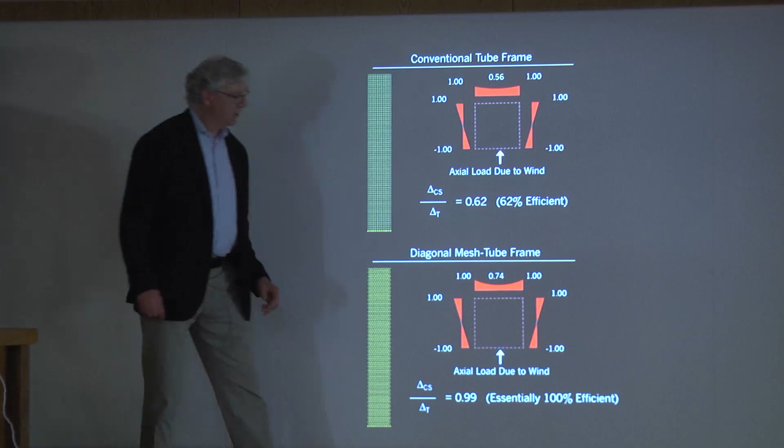In a column-based system or a frame-based system, the load grows in the web, and then it tries to go around the corner, but you can't get the load quite out to the middle. It's a phenomenon called shear lag, because there's an inefficiency in transferring the loads through the frame to the column in the middle, so you get about half the load there that you had on the corner. But if you create a mesh, you increase the efficiency quite a bit, almost 50%, by using the diagonalized system.

And you can imagine if this grew, it becomes less efficient. So there's a geometry change—the tighter it's together, the higher that value would be. But what's really important is that the deformation due to column shortening, either tension and compression, is essentially the same as the total displacement of the building.

Bending's bad. In a tall building, bending's bad. Think about that—if you can reduce bending, you've done the best you can. So here's the answer: it's an idea about systems that form itself to a geometry that's complicated.

So when we designed this building in San Francisco for the competition, about 9 years ago now, it's called Trans Bay, we conceived of the building with a new kind of concept. We didn't win this competition, we lost. In fact, this building's built—it was designed by Cesar Pelli, a totally different idea. But we used it as an opportunity to exercise the ideas of natural form and come up with what we thought was a pretty creative approach to a tall building.

And it caught the interest of people, including a man that I knew. He's now moved along from the Bay Area, but he was the head of the theological seminary in San Anselmo, California, and he spoke about this project to his incoming students. So the seminary students, as they were coming, he mentioned, what if we could coexist, right?

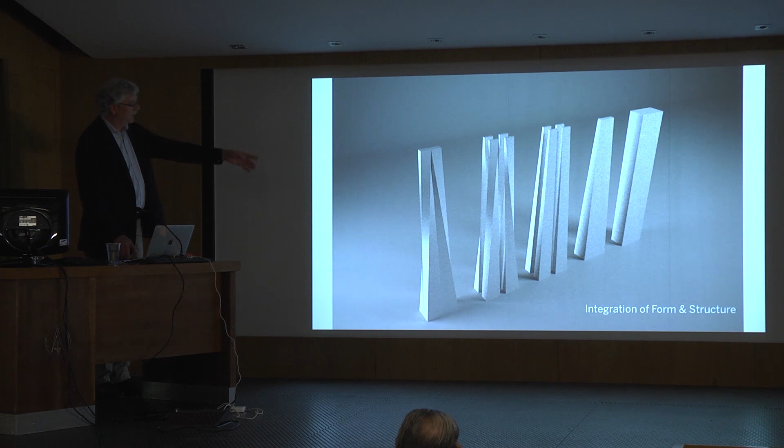The first architectural sketch, we were meeting with an architect. We described what we thought was the force flow. We worked together, and he created this. It was an initial idea of taking Michell, which is the truss to the right, and trying to come up with a superstructure system that pushed load to the outside so we could create an opening at the bottom in both directions, the broad face and the narrow face. This was a system we thought could be resolved and interconnected along the height.

And the idea of two points of support and a single point load—this is the most efficient force flow that you can develop. It leads to the least materials, and it's not straight, okay? It's a bulbous shape, and this is the principle that we use to develop the frame for that structure.

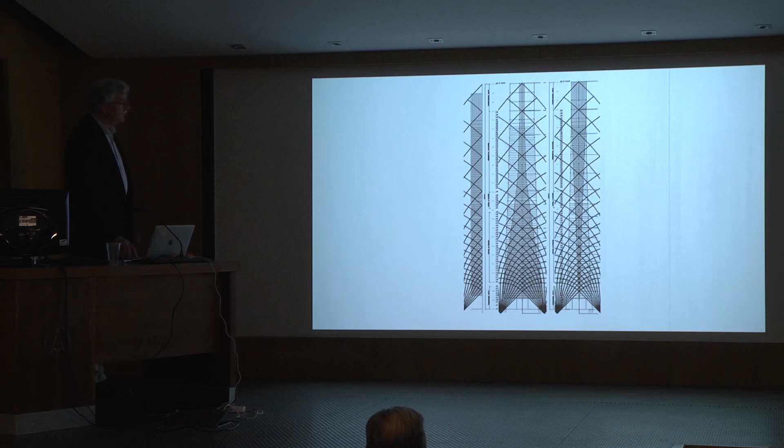Not perfect, right? Because the bulbous form would have been the most efficient way to do it. And then we resolved every single interconnection point on the folds of the tower to create a continuous frame.

So what emerges out of this is something that is really quite beautiful, we think. The base of the building is office, the top is residential. And look at the density: it's less in the frame at the top where you want more sight lines and light, and it's more at the bottom where maybe people don't care as much in the office space, right? You're at your desk, you're working throughout the day. The form at the bottom is much more regular than at the top.

You could express the structure, right? At the bottom, in this case, what we did is we pulled it forward. At the top, we recessed it back, and we had actually balconies and things that would project from it. We could take this concept of lateral load and gravity load and balance it so that we're resisting overturning.

This was being developed post-9/11, so people were asking what happens to tall buildings when they get impacted by man-made or natural disasters. And what we found is that there was a great deal of resiliency in the system, so you could actually remove elements and it was self-healing. The forces were flowing around it, both for gravity load and lateral loads. So we found that it was actually a very good way to solve all the problems we faced in tall building design.

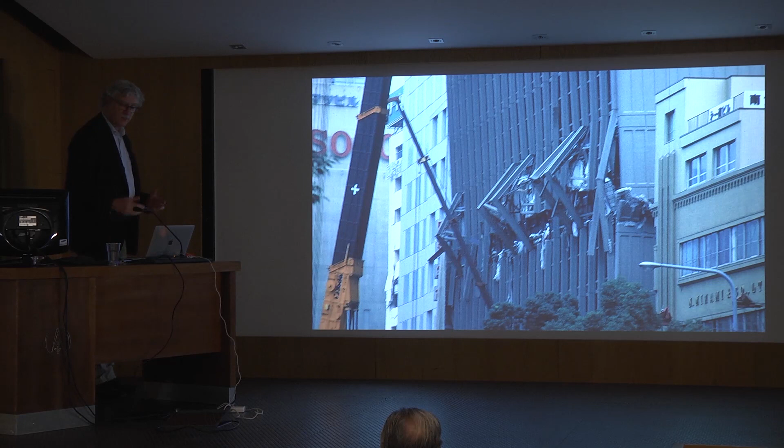What a lot of these buildings incorporated was structural steel buried in concrete for the lower portions. And then what we believe is that they didn't stagger the structural steel in a way that allowed for a smooth transition of stiffness. So they were quite stiff near the bottom, and then there was an abrupt change where there was a change in stiffness, and actually a shearing and an instability that occurred at those levels.

We also saw very large ground motions, amplification through soil. So we talked about building period, and we talked about the impact of sitting on rock. When you sit on soft soils, the earthquake gets amplified, right? So if you have shallow foundations like this building, you can see that it's disrupted by the motion of the ground, and the soft soils are amplifying the demand.

So this building was City Hall, and it was City Hall that actually transitioned to an office building. This became the new City Hall here, the taller building. But you can see that something happened to this building that's quite unusual — we lost the entire floor, I think it was the 6th floor. And it was because of that change in stiffness, I believe, that the entire floor pancaked.

Now, it wasn't a progressive collapse. The entire building actually didn't come down. And I visited the site about 8 years later, and this is what I found: they reused it. They chopped the top off, and they created this structure, okay?

So there are ways of adapting and ways of thinking about this that are super important when we talk about buildings and resiliency, right? And when you talk about tall buildings, there are these challenges. We talk about an outrigger system — it's a great idea to link these two together. But during construction, you want to let them breathe, right? You want to let the building breathe.

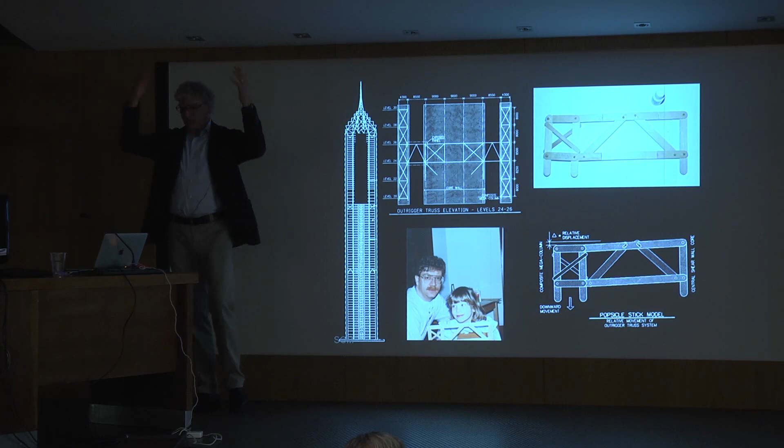So we created these pins in this truss system. This is the working drawing. This is at the fabrication plant, and this is the scale. This is one of the joints, you can see the pinhole. There it is in place.

The idea was the pins were put in. There were some temporary bolts that were put in, you can see it for fit. But those bolts were taken out. The pins were left in place.

It moved. These huge members moved during construction. And then we put all the bolts in. They're all oversized holes, and we calculated that the change in geometry was such that you would never violate the two oversized holes overlapped on top of each other. You could always get the bolt through. Anyway, that was the idea.

So here it was with the mix of materials. We talked about this earlier. But that idea of creating this interconnection that allowed for movement was important.

So the building is very successful. In fact, it just celebrated 20 years after being built and occupied. It's a commercially super successful building. But it was a challenge to build, a challenge of ideas. And it used those 8 big mega columns that I showed you earlier, and the linkage of those 8 columns to the core as a structural system.

In Chile, south of Chile, this is the Isle of Chiloé. It's a beautiful place. This is around the same time as the Kobe earthquake in the mid-90s. And I went there and visited this town, a beautiful place with churches, Jesuit churches.

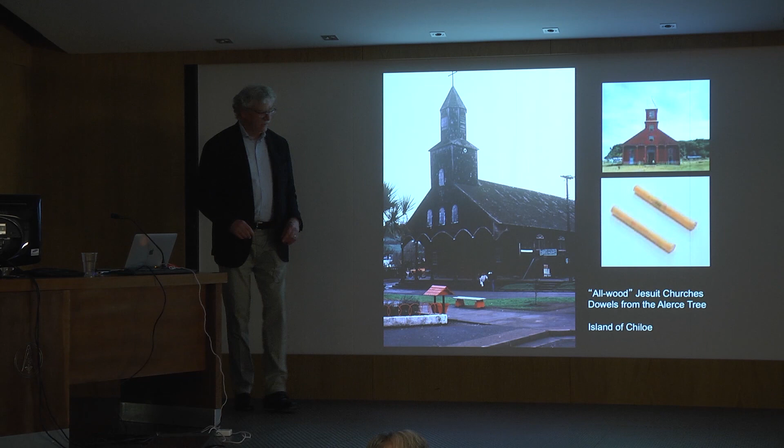As many of you may know Thornton Tomasetti as an engineering firm, Richard was one of the founding two fathers, so to speak, of the firm. And he was dating a woman at the time, so she was there. So Richard, his girlfriend at the time, and an architect traveled around and looked at these churches.

And I went up inside here and found that inside the church, all the trusses used these wood dowels. All the connections were done with wood, no metal fasteners. I thought, wow, that's pretty interesting, because guess what that does, right?

This is like a pin that could rotate, but there's friction. Or it could slide in a slot, but there's friction. And I was convinced that that detail protected the structure from damage in the earthquake, because it fused the joints. At one point it allowed the joints to rotate, but not freely, not loosely. There was a restraint, but it didn't lock the joint so the members failed. So that was the impression I had.

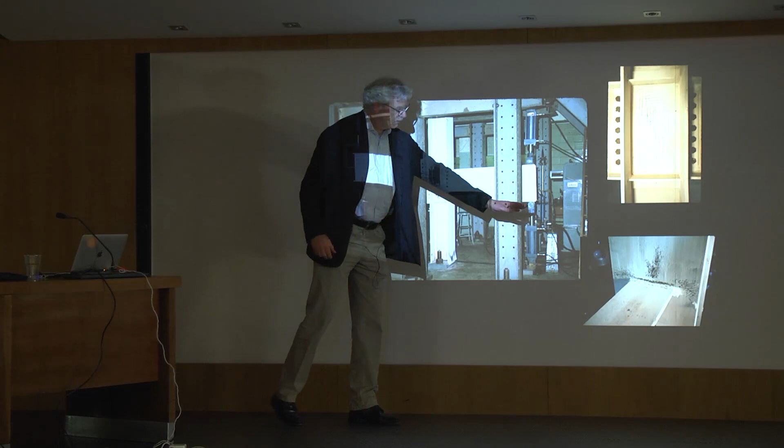About 10 years before, I was at Lehigh University testing these beam and column connections. They had bolted webs, flanges that were welded. I kept thinking, it doesn't make sense to take a structure, put it through cyclic motion like this, and fix everything in a perpendicular fashion. You can see the stress concentrations at the face of the column. It's not natural, right? It doesn't make any sense.

These welds broke. This was testing done for the American Institute of Steel Construction, at the tail end of a testing program. People were tired out. I was just a kid in college, graduate school, and I'm writing about these, saying well, this is not really a ductile connection, it's kind of brittle, but it's safe. You can see there's deformation in the column, but the energy is dissipated here. The structure doesn't fall. This is 1985.

1984, 1985. In 1994, in Southern California, there was something called Northridge. For those who know about the Northridge earthquake in the United States, steel frame buildings did exactly this. So what happened was we had proved to ourselves that the buildings would be safe, but they're not very resilient. So there's a lot of movement now in the community to create more ductile connections.

But I would argue if you could create connections that are more elastic, that's best. So take this idea of pins and friction, whether it's a rectilinear frame or brace frame, and create systems more like your body, where there's a pin in the beam through the plate, and there's a curved plate. Then you clamp it together. There's a friction material here, so based on the clamping force and the friction material, you know when it's going to slip. It's pretty straightforward: F equals mu times N. Simple. You can calculate when it will rotate.

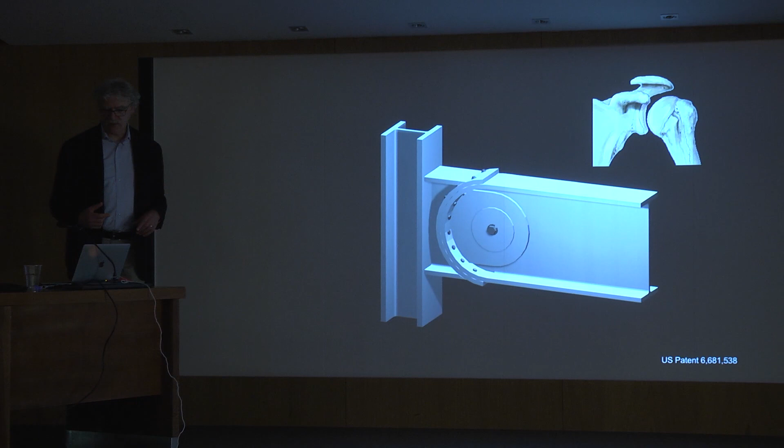It stays fixed for most of its life. Wind, moderate seismic, it doesn't move. Big seismic, big bending moments at the face of the column, instead of damaging the beam, this thing rotates. It dissipates the energy through friction and heat, like brakes in your car. You use these basic components that you see in the building industry, and you create frames that look like this, rather than everything all welded up.

I don't know, it's an idea. It's hard to make people build this though. They don't really want to build it. It's too complicated, or whatever. I don't know, it's not that complicated. But here's the frustration of design and construction. We're getting there, it takes time to convince people that this is a good thing.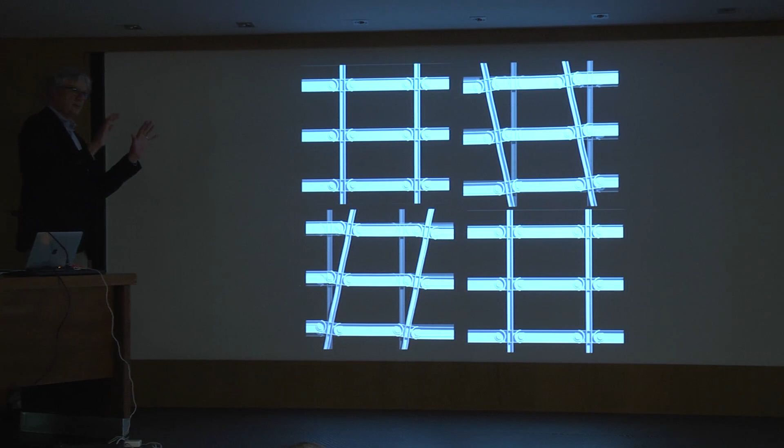So instead of damaging the structure the way we design them today, maybe they fuse, and you try to keep the system elastic. Keep the column elastic, the only inelasticity is through the friction dissipation of energy. This is elastic. You don't fuse them all at once, you design it so some of them fuse and the others tend to pull it back. There's elastic energy in the system. You can use pins in other places that you don't expect.

Building in China: 90 meters to here, 60 meters to here. There's a museum, office building. What we wanted to do is create the largest, almost structure-free glass wall in the world—the largest cable net in the world. That's what we wanted to do.

Now, we didn't start that way. We started with trusses, like you typically do—we'll put trusses across here, hang them from the top, they'll span across. Some of the early renderings, you looked at the inside of this atrium, loaded with structural noise. So if you were to create a glass wall with cables and try to span 60 meters by 90 meters effectively, it moves way too much. It's almost impossible, you just can't design it.

So instead, we said, why don't we use the cables here and here and connect it to the top of the museum, and form a way to allow for the glass wall to be braced. That was kind of the idea. What happens when you put this here and here and here in an earthquake? Well, it becomes a braced frame. And what you find is that you can't design the cables anymore because the structure is so huge.

It just pulls it across, right? This huge frame moves it. You put more material here, it still fails. It attracts more force. So what to do? Well, we have a problem.

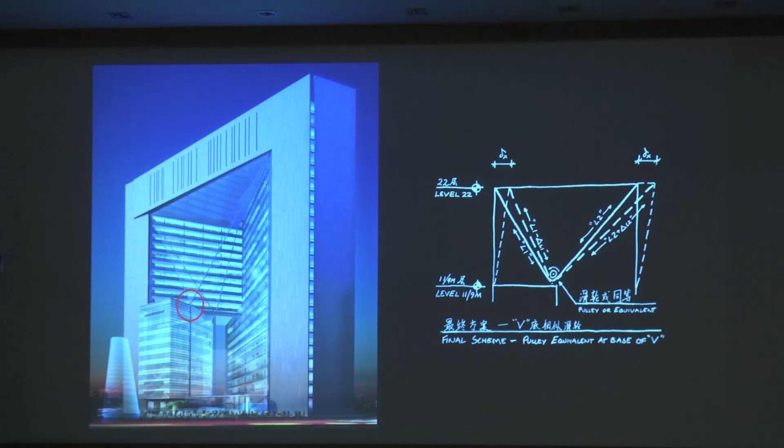So we went to our architects and said, we want to use a pulley. This is 10 inches in diameter cable, and in order to make the cable work around the pulley, it has to be twice as tall as this room, okay? Huge. And we said, well, wouldn't it be beautiful to see that big circle there, like this big pulley? The architects were like, get out of here, you're not gonna do that. It almost looked like this, you know, like huge.

So what we did is we tried to think about how would it behave. Concrete. I showed a plan of this building earlier today. I talked about a system of a Vierendeel. It was actually on this side of the building with the concrete walls. So anyway, the building itself was fairly straightforward, but here's the problem.

So we got the high strength cable, 220 millimeters in diameter. And there's the cable net, 34 millimeter cables on the horizontal, 26 millimeter cables on the vertical, and we needed to use this system to brace the wall. It still moved about 3 feet in the wind, in the 50-year wind.

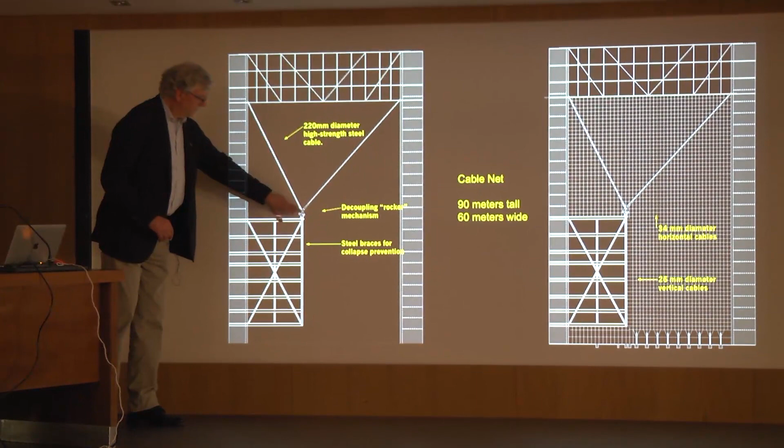Okay, so here comes the pulley idea. But then here's the pin idea, using principles of allowing the motion like Jin Mao, using 3 pins and then a 4th pin to allow for movement in the other direction, right? Because the building could move this way too, it could rotate. So this model was used

to study the behavior of the joint. If these elongated, we had force. If they didn't elongate, no force. Pretty simple. So you could move this frame back and forth, and in fact you'd find the spring didn't really elongate very much, stayed pretty constant. So it was a pretty good idea.

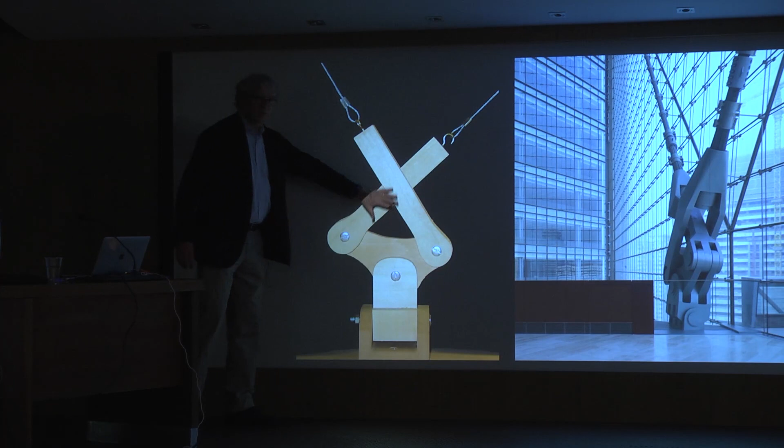So if you look at it in motion, it looks like this. It's asymmetrical, the arms are different because it's not in the middle, slightly off. The model became, sort of like, a better version of the popsicle sticks, right? This is a little bit nicer. And anyway, that's what you get.

Okay, so the ideas of motion, right? Scale, in this case, really different. This is the architect next to me, Brian Lee. You have to sort of have will and ambition to do something like this.

The cable net is still the greatest, tallest in the world, but it's a systematic approach to dealing with glass and seismic movement. You can see there's a little bit of imperfection in the wall, a little bit of pillowing, because this point is not flat with the glass, it's pushed in. So we had a combined effect of the diagonal supports stretching the cable across those big other cables and then pulling them, and when we did that we found there was some out-of-plane movement. So the planes, the 3 planes of glass, are not completely flat.

And if you look at it from the inside, it's a highly nonlinear problem. This is the main cable. This is what it looks like if you look up the cable.

What's happening is that the wall, when we stretched it, was pulling that cable out of plane. So we had to engineer every single link so that in its final deformed condition, we were as flat as possible on the outside. Not an easy thing to figure out.

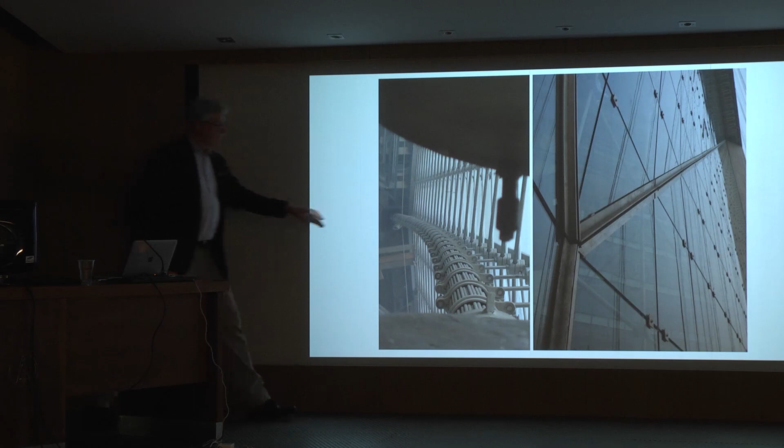There's a lot going on between the demand in the cable itself, which had a certain level of pre-stress due to the weight. So you had to calculate that relative to the amount of pull we were putting on it, and we did it incrementally to get it into position. It's a way of taking a problem we created ourselves and turning it into something pretty unusual, and it works.

Link beams in tall buildings get damaged. If we can prevent the damage in the link beams, which are typically the sacrificial piece in these taller concrete shear walls, then we have a more resilient structure.

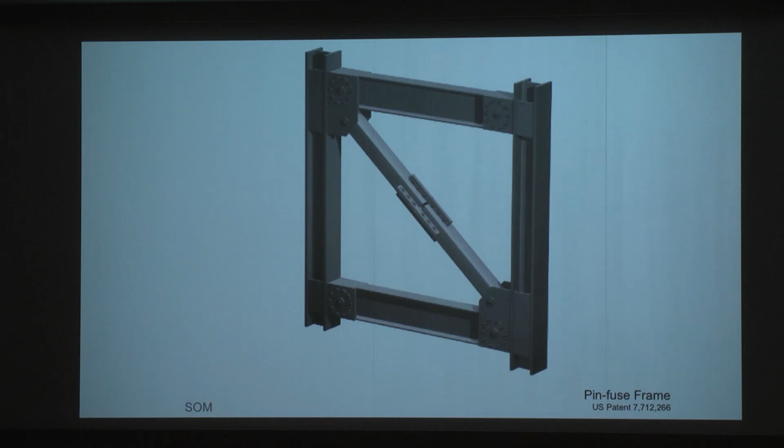So it uses the principle of friction and clamping, and then it will move when the demands are super high. You could also use this in braced frames, like this one, and use circular hole patterns to allow for the rotation.

One other point about resiliency: our concept for the train station next to that tall tower at Transbay was to seismically isolate it. It was a fairly brittle steel structure, not a lot of ductility in the system, so we put the ductility at the bottom.

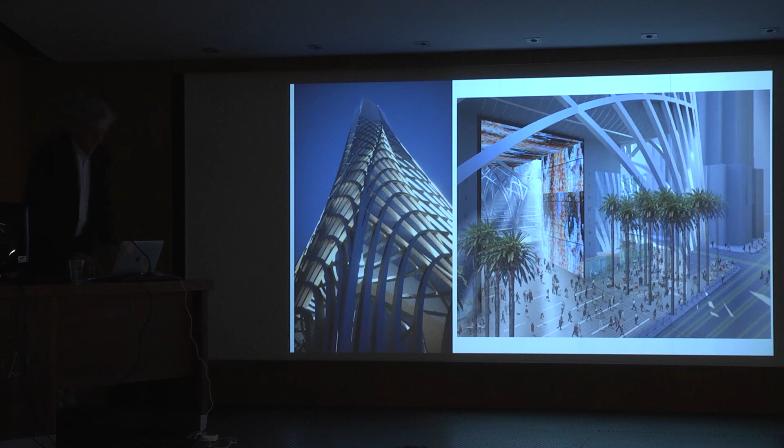I'm going to skip through this piece. There's a piece in the book that talks about performance and performance-based design, largely seismic design, based on the principle of using higher levels of engineering to deal with buildings.

Typically, I'll just show this image. In San Francisco, there's been a move to reduce construction in some of these taller buildings by eliminating the frame that, by convention of the building code, would have to be there in addition to the core wall. The idea is to solve the building outside of the building code using what we call a core-only system, where all the lateral loads are taken by the core.

In a traditional sense, lateral loads would be shared by the frame and the core. But there have been techniques developed and guidelines to allow us to engineer systems that are core-only. They're less redundant, but more carefully looked at.

So this is an example of a building in San Francisco that used this technology. This is a rendering, but the building's actually built. It uses a core-only system, with gravity columns on the outside, and special detailing around the columns for the slab. But that's the lateral load resisting system.

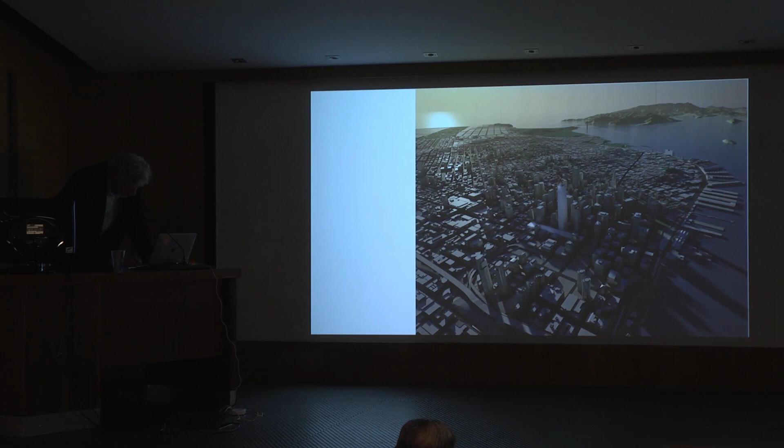Okay, last thing I want to talk about is the environment. This is Transbay, actually, just a ghosted model of that building. If you remember back earlier today, we talked about...

The soil conditions and so forth, and the fact that this sits actually in the water, the original water line. But the reason for thinking about this, and we were thinking about it when we designed for the competition, is that the carbon emitted the first day we build is sometimes more important than the operational carbon. In fact, if your building is substantial, say 15 to 20 stories tall, it takes 20 years for the operational carbon to overcome the carbon you put in the first day.

So we've been saying to the community, we need to focus on carbon in structures, because if we can reduce this, then we reduce the impact, and in many cases we can reduce it for many, many years to come compared to the operation. So for example, if this building came out of service before 20 years, this would be the most important thing.

The other thing I'll say is there's been a lot of work that continues to drive the operational carbon down in buildings. So this becomes even more dominant when we talk about the efficiency of mechanical systems and so forth—we drive the carbon down. The embodied carbon the day we build is really important.

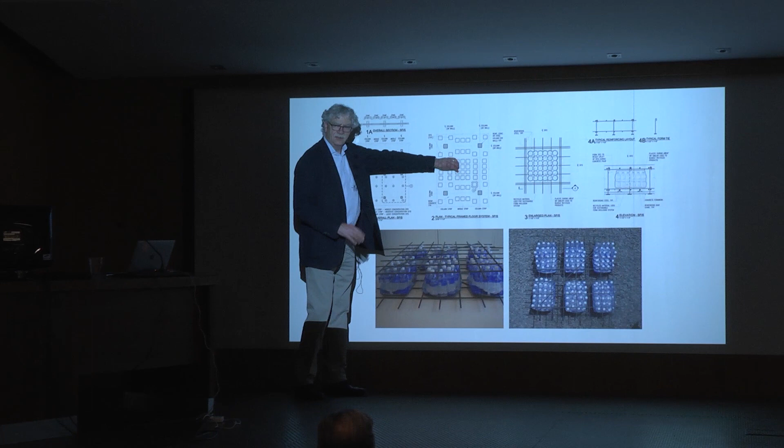So if we could put waste into our structures in a smart way, get rid of the concrete where you don't need it. A lot of times when we build a two-way slab, we load it with concrete everywhere. But all of us who've engineered a two-way system know that the concrete in the middle, all you really need it for is to bond the reinforcement top and bottom, and you could create voids here and get rid of the material where you don't need it. Here you need it for shear.

So the idea might be that you replace the concrete with lightweight material. We had the crazy idea of using empty water bottles—trapped air. Put the cap on it, put them in cells, put them in the structure, make it lighter. You can make it out of these blocks because, you know, the water bottle is a good idea, but it's a little bit hard to work with them.

You can put it into conventional buildings like this one and create these ideas that seem far-fetched, but we think that people start to get interested in thinking about how you might use materials inside structures to make them behave better—lessen the mass, reduce the concrete.

Do it with flat plate construction, top and bottom flat plate, no beams. Reduce the weight on the foundations, and then the seismic mass, as we talked about earlier, gets into the lateral system like the core walls. Save material—concrete, steel, make it more efficient. That's our hope, okay?

It hasn't been built yet. That's another idea - it's not built yet, but we hope.

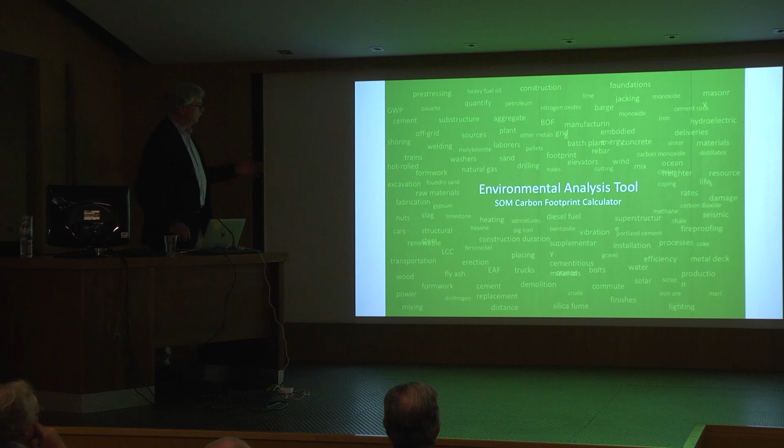How do you calculate carbon? It's super important - carbon is based on lots of material types. It's based on material, it's based on construction, and it's based on how buildings perform. Those are three of the main characteristics. So back to the city, as we think about the city in these parametric models, and back to this carbon calculation, which we think is really important. This is the embodied carbon.

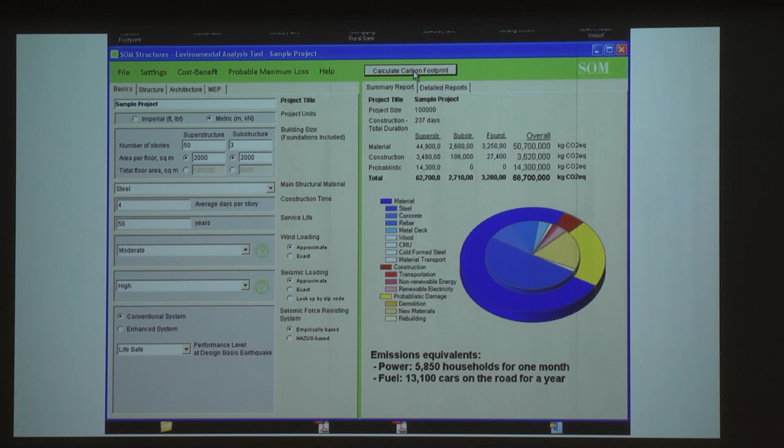If it's a conventional system and it's life safe, that's the minimum requirement. But the program allows you to look at how much material we believe would be in a 50-story building in an area of high seismicity. It calculates the amount of steel required for this structure, how long it takes to build based on the assumptions you give it. Then you can get into the carbon associated with the material, where it's coming from - the program looks at that. It looks at how many people we think are needed to build it, travel time, distances - all that stuff is there. It comes up with a value you can equate to other things, like the power for homes or fuel for cars. It's a way to bring it to people so they understand it's a big deal - it's in our buildings.